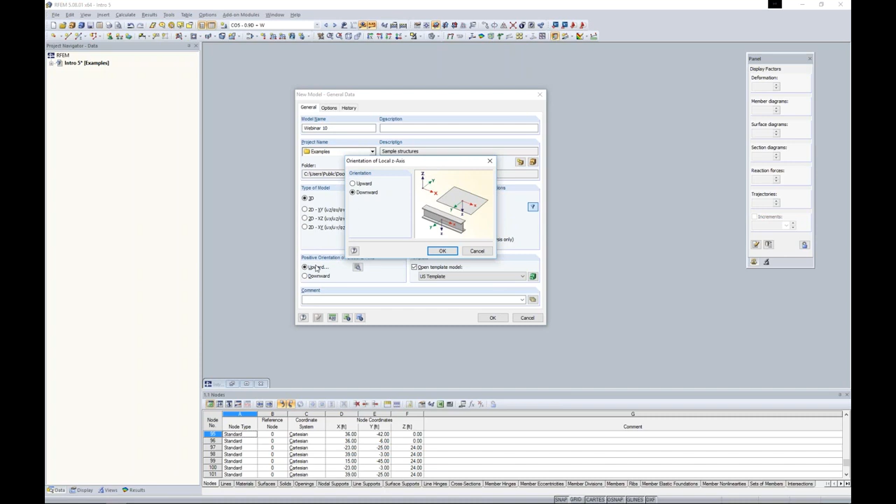The orientation of the global z-axis, that by default is set to upward for the United States install. That's typically what we work with here. Under Details, we'll want to make sure that our local z-axis is set to downward. This is more so important for concrete design; otherwise it really doesn't matter in the program. But I always suggest if you have the global z-axis upward to set this as downward for our local member axis.

Over here, we have Create Combinations Automatically checked on. When this is checked on, this is telling the program to automatically create these load combinations according to a specific standard that I select in my dropdown. This is where you can see that we have the ASCE 7 load combinations, IBC, the Canadian standard, as well as Eurocode and several other international standards.

When I have this checked off, then I can manually create those load combinations. They won't be automatically created for me according to the specific standard.

The template model down here is important because I think it's a very beneficial option. For me, I have this US template, and this just has the grid settings set up the way that I like, maybe my units, perhaps certain materials and cross sections that I use quite often.

Once I'm in RFEM, I can always go to File, Save as Template, and then that template will be available in this dropdown. This is great for companies who maybe do a lot of similar structures and all start off with the basic type structure to begin with. You can model that basic structure and pull it up in your template model every time, then make further changes.

So now we're ready to jump into the program. When we first open up the model, we have our graphics view located in the center of the screen. As we begin to draw elements within the model, this is where they will begin to appear.

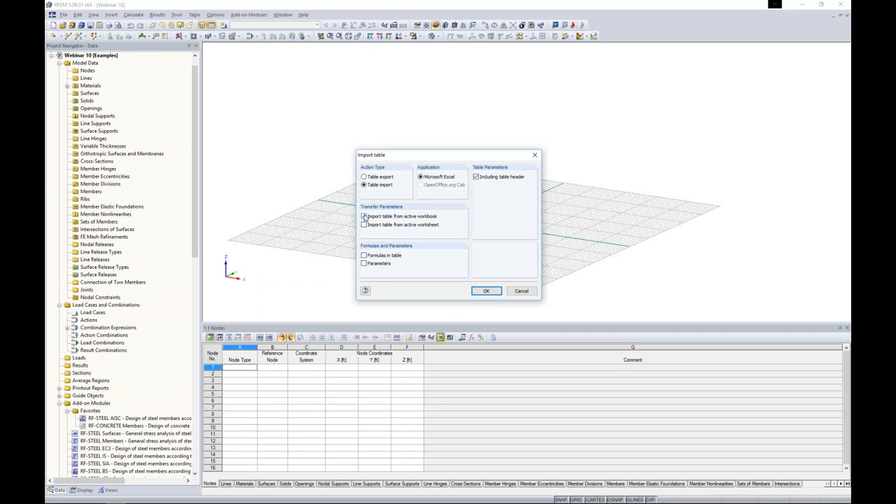For example, we can export this table for our nodes to get the basic layout with all of the correct columns. We can input our data in Microsoft Excel, maybe sort it some different ways, and then we can import directly from Excel according to the active workbook and worksheet that we're in the background.

A few other options that we have for modeling are, of course, all of our little tools up here, which we'll be using quite often today. We also have our drop-down box up here. For example, we have all of the add-on modules listed according to the different categories, such as steel, concrete, dynamics.

We also have the Project Navigator, and the Project Navigator is just another option to input your data. We will also view our results in the Project Navigator. So this first tab down here called Data, this would be all of our input data, and here is our long list of add-on modules here.

So you can understand that we serve our customers the add-on module concept because we really want to create a software that's catered to you and your needs, rather than charge you a very expensive software where you get all of these add-on modules regardless of whether you're going to use them or not. For example, you can see all of the different international steel codes that we have here that probably most of the time users aren't going to be utilizing. So, as I mentioned, a very long add-on module list.

The display tab really controls everything that we're viewing graphically here, including our results after we run an analysis, as well as the input data. Our views tab looks pretty empty right now, but as we begin to generate our structure, this will allow you as a user to create user-defined views, to view certain materials and sections quickly, rather than having to highlight and select them graphically.

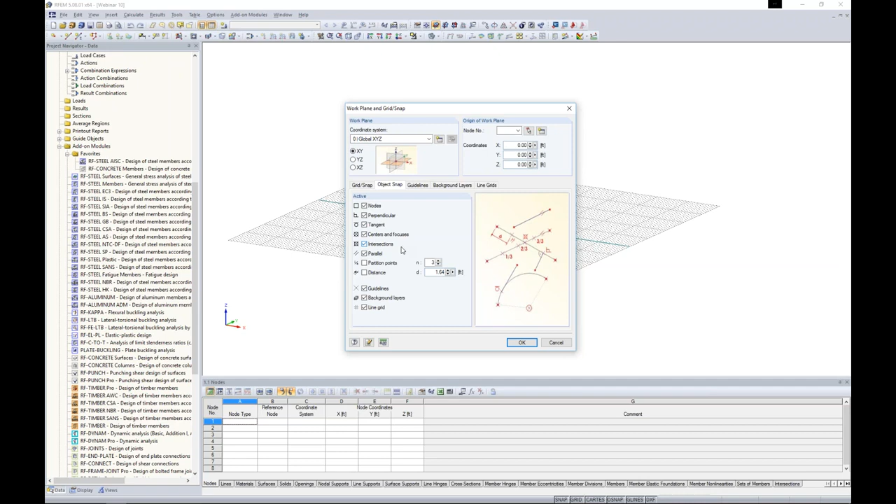And this is for the reason sometimes I tell users you're almost better off just starting modeling in our program rather than importing a DXF file, because it's easier that way, due to all these different tools that we have. But with that said, you can import DXF files too.

For example, under the background layers tab is where we can import this DXF. And what's nice about the different background layers is I can put multiple layers in here, so maybe I have a different layout for every level of a multi-level story building. Well, I can go ahead and import that DXF file at multiple elevations.

The line grids option - if I create a new line grid here, you'll notice in the background that we have our typical 2D layout of our project grid. Well, this allows us to do a 3D project grid. Down here at the bottom, you'll notice some different options that we have, for example Cartesian, which is maybe more of a square, rectangular, 3D drawing grid. But we also have spherical, cylindrical, and incline.

So this really plays an important factor, again, for these not so simple geometries that you may have, but have different snap points in a 3D type environment that you'd like to utilize. Well, that's where these line grids may come in handy.

Under the grid snap settings, this is my current grid that I'm viewing here. Default when you launch the program is this rectangular grid, but we can change this to polar if we'd like, if we're working with a circular type structure. Right now for Cartesian, I have 50 feet on either side of my origin, but I can also check this checkbox so that the project grid will actually grow with the structure, moving dynamically according to the size of the model. Or if I shrink my structure down, that project grid will shrink down too, so I'm not always having to go back in here and change my settings to something bigger or smaller.

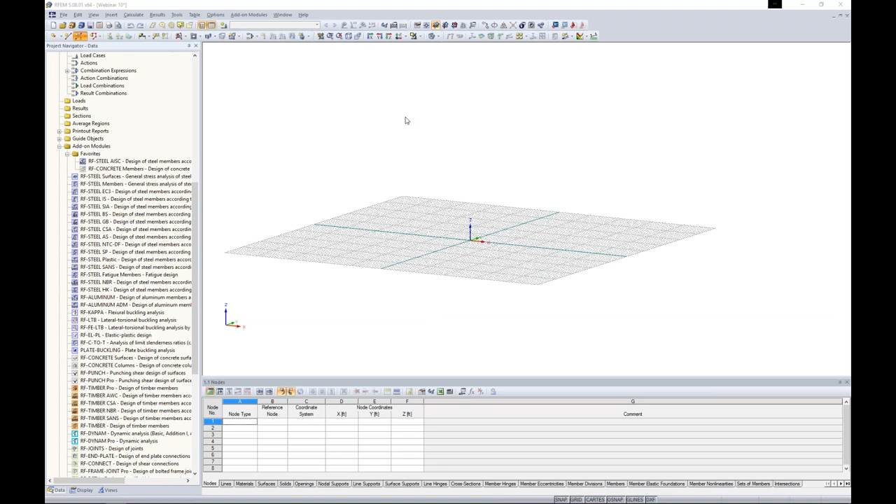For now, we'll just leave everything the way that it is, and we can begin with our first column. So the first thing I'll do is go up to a new single member. Now, the member type is available in this drop-down here. The member type beam is anything that's just a typical beam or column type element. You'll also notice that we have many other options in here. A rib is something we'll utilize a little bit later on, but we also have tension only, compression only, buckling is something that we'll also utilize in this model today.

And then because of our nonlinear capabilities, we can do things like cables, or cables on pulleys. We can get into spring elements. So quite a few other options than just your typical application of a beam or a column.

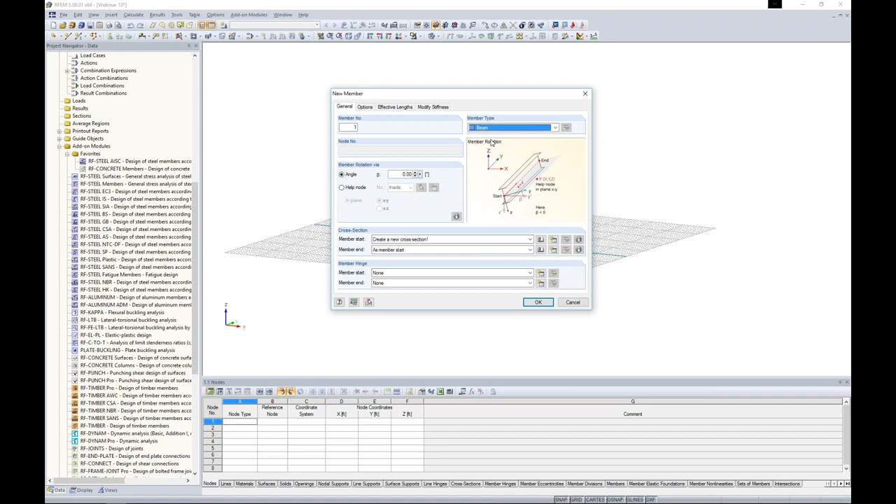But with that said, we will choose the member type beam and we'll create a new cross section. Launching our cross section library, you'll notice that we have our rolled sections where you'll find all of the sections from the CSA code, the AISC code, maybe aluminum sections from the ADM. These are all available in our cross section library.

But we also have these parametric thin-walled sections. We have massive sections for concrete. You'll notice maybe in some other software you're really left with only a rectangular or circular type application for cross section. But here we can utilize things like I sections, T sections, same with timber sections here. And we can even get into built-up type members. So we're not limited to just those sections directly from the codes, but we can really utilize a wide array of cross-sections here.

For example, if I have an odd thin-walled cross-section here, all I need to do is to define my geometry, and then the program will automatically calculate the section properties for me.

We also have two standalone programs called Shape Thin and Shape Massive, and this is where you can import in a DXF file, for example, and that will calculate the section properties for you, and then we can import them directly into RFEM. Those are standalone programs.

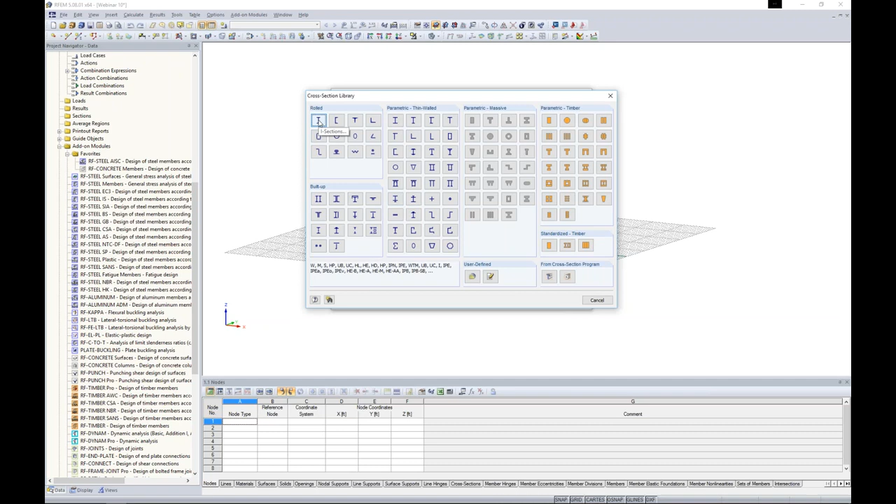For today, we will go with a typical I section, and here is where we can use our filters on the left-hand side. From the first drop-down, you'll see that we have many different standards here. So that's great. If you do a lot of international projects, you'll have access to all these as well in RFEM. This is independent of any add-on modules.

Today, we'll be working with the AISC, and we want to first choose our W shape. Now, we have this long list of W shapes, which just comes directly from the AISC 2014.

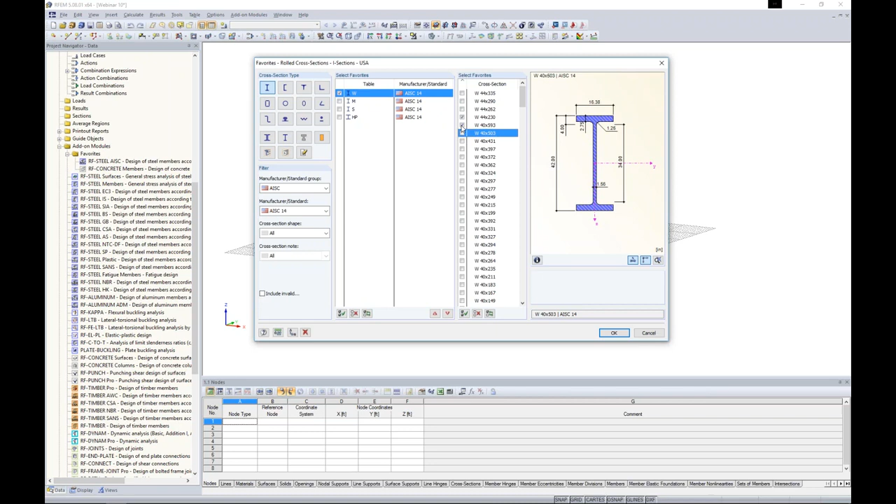But perhaps you use a lot of the same sections and you don't really want to scroll through this long list every time to choose your specific W shape. Well, this is where we can utilize our favorites group. With a favorites group, and I choose my edit button here, I can simply check on or check off maybe a set of sections that I use quite often. Then when I click OK and I activate this favorites group, then I'll have these sections available from a quicker list than having to sift through everything.

For today's example, I added a couple W shapes that I know I'm going to be using for this example. So now I have quick access to them.

We can also set the material in the same dialog box. You'll notice in this drop-down menu, the default when you open up RFEM is concrete F'C 4000, and we have steel A992. So for right now, we'll just utilize the default material in the program, but later on we'll have to add in some more materials to that.

The member hinge is set at fully fixed. So right now we will not add in any member hinge, but later on we will do this as well.

So now I'm ready to draw my first member. Well, typically when drawing the member, we need to change maybe our drawing grid and maybe snap to a couple different points. But another useful feature with this dialog box when I'm drawing a new member is to simply specify the length and the direction.

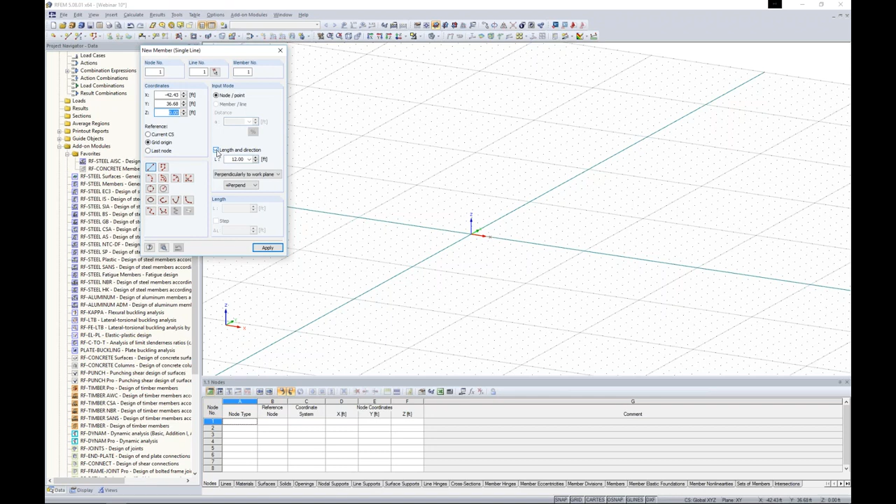So I can set the length to 12 feet here, and I want to draw it perpendicular to my work plane. My work plane is set in the global X-Y axis. All I need to do is just click on a couple points here to draw in my first columns. Now you'll notice that the orientation is in the correct direction and my length is set correctly too with that useful feature.

The next thing to do is to draw a beam member connecting our two columns. So again, I'm just going to go to my Draw New Beam. I'm going to create a new cross-section. And once again, choosing a rolled cross-section under my favorites list, I'm going to choose a W12 by 40.

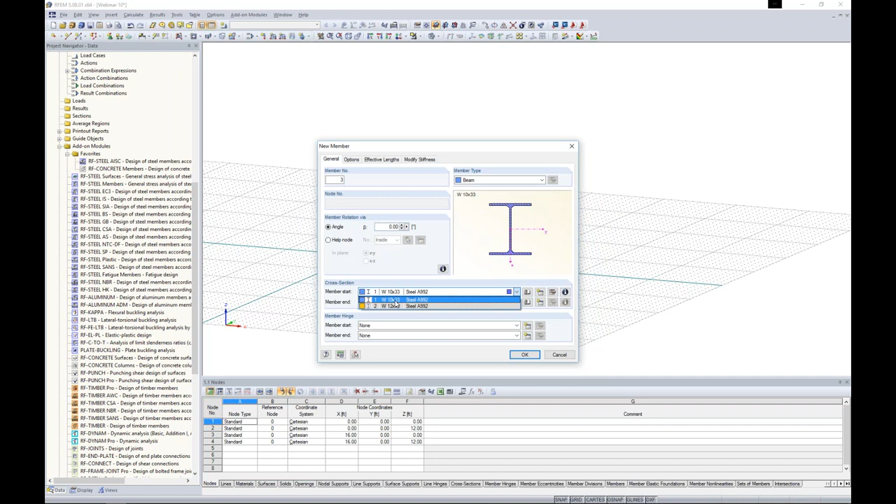And I just noticed I used a W12 by 40 here. That's okay. I wanted to actually use, which I can click on this Edit Cross-Section, and we can edit it here to quickly change that 12 by 40 to a 10 by 33. That's my column member. So now you'll notice that my columns are 10 by 33 that I've already modeled in here.

And then my new member will be a W12 by 40. I want full fixity, so still no member end releases. And now I can snap to the top of those columns, and you'll see those green snap points pop up. That's just related to those snap features that I showed you when we first opened up the program.

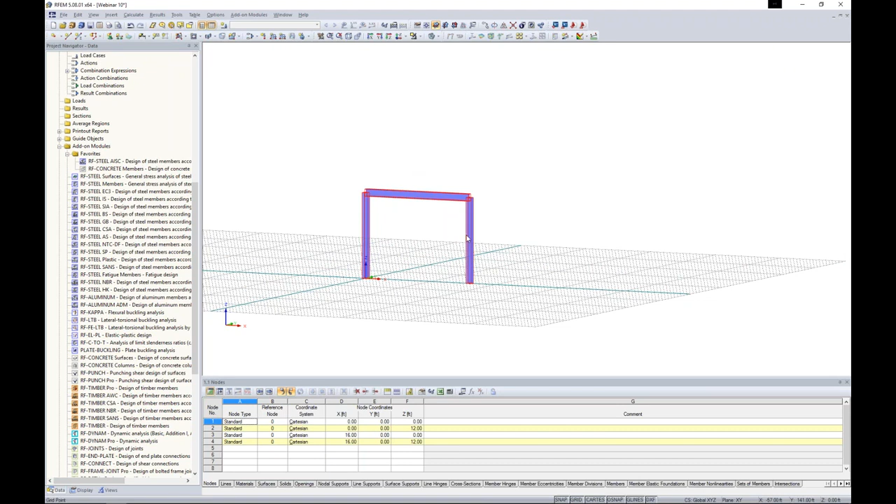So I want to create a couple copies of these. Rather than utilize the Move Copy tool, if I just highlight everything here, I hold down my Control key, then we can utilize the drag and drop feature. So we can quickly create copies of this member, additional couple stories here, with just holding down the Control key, drag and dropping, and the program will do that automatically for us.

Now the next thing I'd like to do is to select all of these members, and I want to right click under the member option. I will create nodes on lines and intermediate nodes. So here I'm going to add 2 intermediate nodes, and you'll see that this member is still a single continuous member, and these nodes, if I double click, are of the type online. You can see here we have either standard or online, so the program knows to integrate that directly into that member.

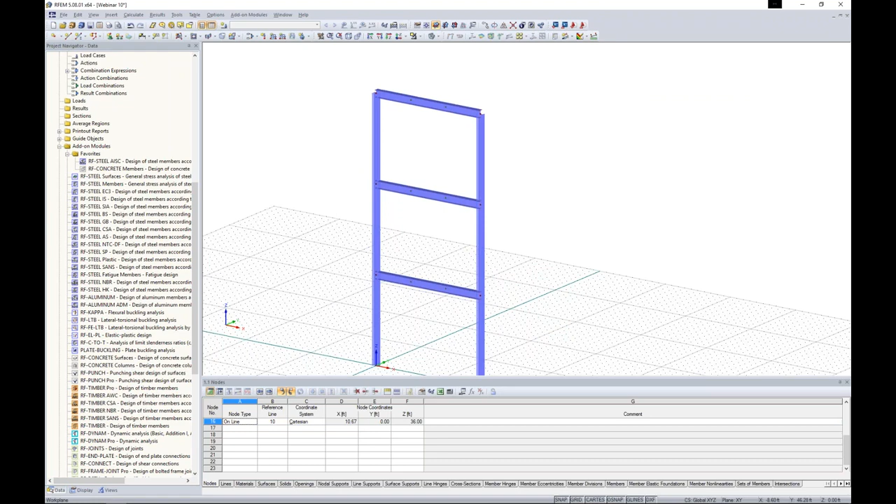So now that we've added those nodes, I'm going to select everything above my bottom two nodes, and I'm going to utilize the Move and Copy tool here. I'm going to create two copies in the global Y direction of 16 feet. And we have a special feature down at the bottom of this dialog box called Edit Expanded Settings. So when I open up this additional dialog box, we can actually create lines in between our copy nodes, and even more so, we can assign a member cross-section to those lines.

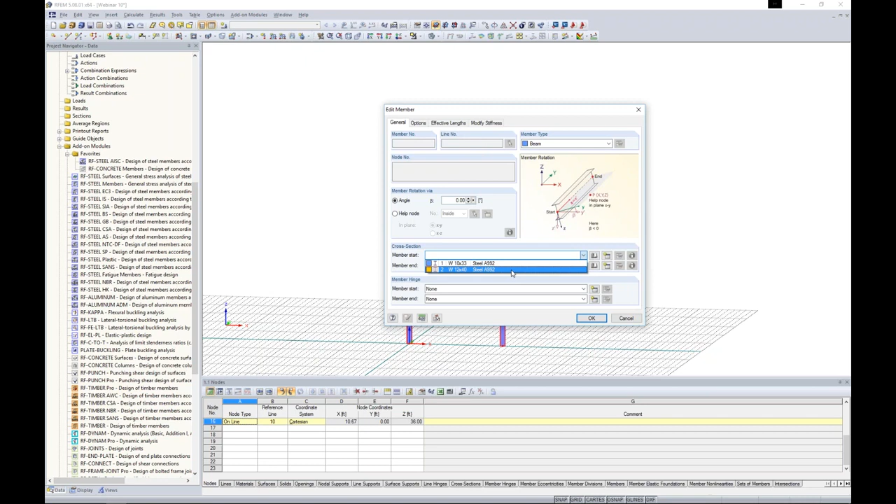Every cross-section or every member is composed of a line underneath it. So because we're creating members between these copy nodes, maybe I want to choose a cross-section from my Edit Member dialog box here. Well, I've already defined the W12 by 40 previously, so now that's available in my drop-down box here. I can click OK through all these dialog boxes, and now you'll notice that the program automatically created these beam elements between my copy nodes, so I don't have to sit there and draw in all of those additional beams, but rather utilize that function.

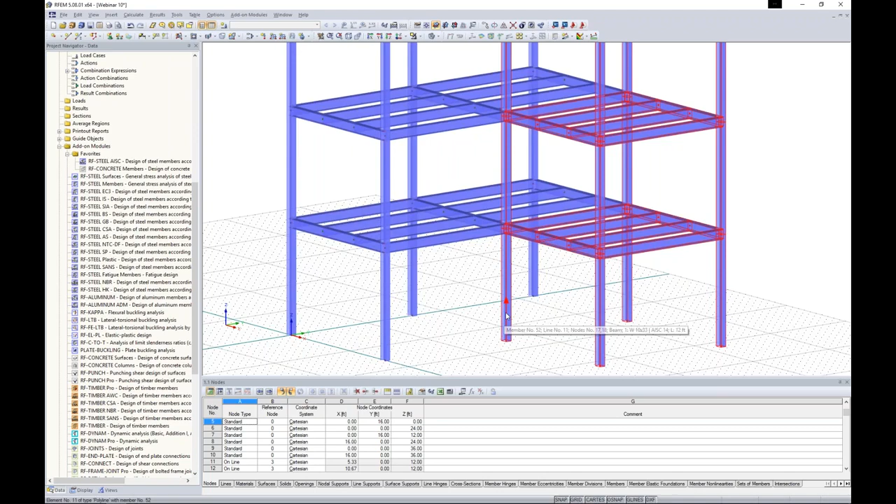So now I'm going to select this rear portion of my steel frame, and holding down my control key again, I'm going to make an additional copy right adjacent to it. And you'll notice that when I made that copy, I technically created a column on top of this column, but the program's smart enough to merge those together so we don't have any issues with duplicate members being on top of each other. So again, a nice feature of the drag and drop. So essentially, we have the basic structure for our steel structure here.

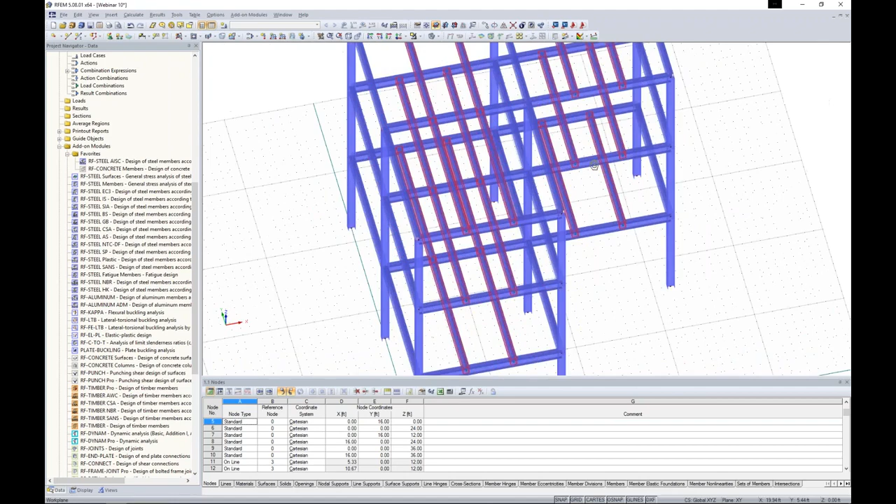Now, the next thing maybe we'd like to do is to put this into elevation view, and I'm going to hold down my control key to select all of my intermediate beams here. You'll notice that they are highlighted with red, and what I can do is to right-click under Member and choose Edit. Now, under the Member Hinge, this is where I'm going to create a new member hinge. Up pops our member hinge dialog box.

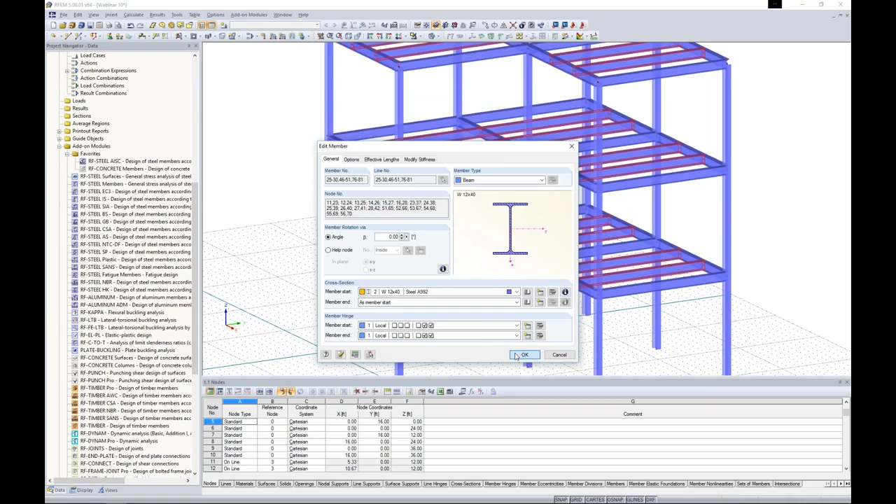Again, this is very technical if we want to get into the more advanced features of modeling. We'll just leave this as none and apply a simple moment release to the ends of our members. So now for any member I model in the future, I'll have this simple moment release to apply from my drop-down box.

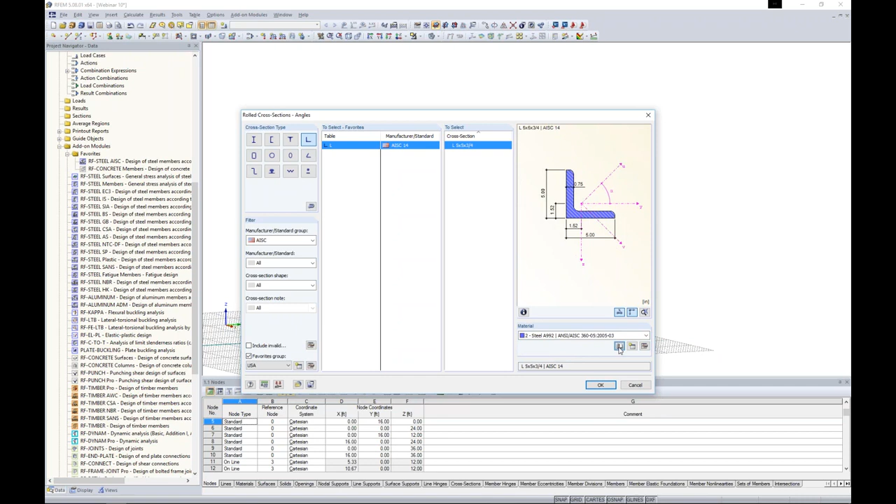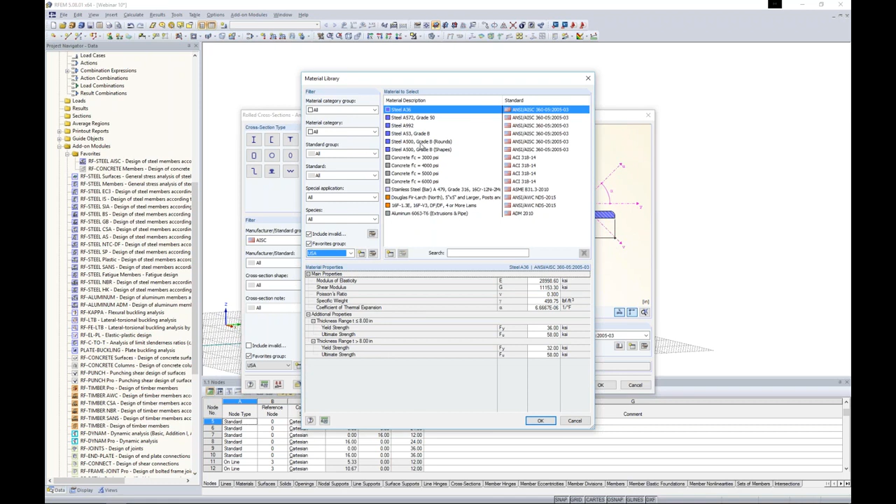Steel A992 is not applicable here, so I can quickly create a new material. This material database looks similar to our cross-section database—we have filters on the left and all the materials from AISC 360. But I can also activate my favorites group, and you'll notice I have just a handful of materials I use quite often. Steel A36 is what I'd like to select here. I click OK, click OK.

Now for the member type, I'm going to set this as buckling. What does this mean? It means that when this member exceeds the Euler buckling load, the member will be taken out of the analysis and the iterations will be rerun. This makes sure that if a member fails, our structure is still stable. So we'll set this to buckling.

You'll notice that member hinges is automatically grayed out. This is because we assume you'd like to have a full moment release for any type of tension-only, buckling-only, or compression-only member. We click OK, and now we can zoom in and snap to the corner points where we'd like to add this bracing.

So once I have these two braces modeled, I can use my selection tool and utilize that drag and drop feature to add some additional bracing to the structure.

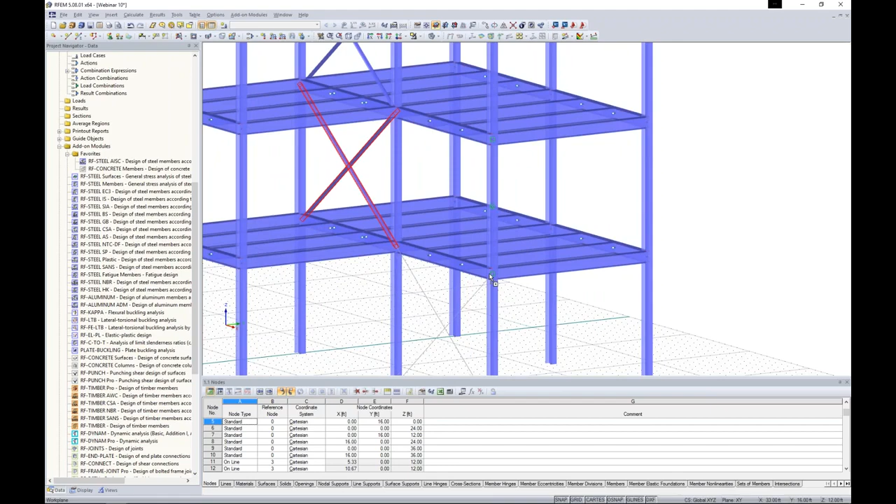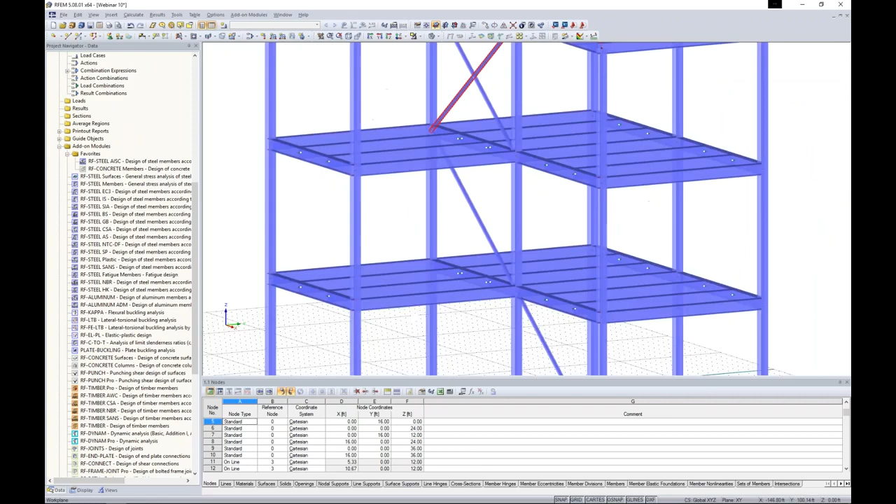Looks like we have some mistakes here—no problem, I can delete that and draw in an additional L member here. All I did was not snap to the correct place, but you can see how quickly it is to select your member, delete it, and recreate it using the drag and drop feature once more, and that looks a little bit better.

So now that we're done with our steel structure, what I'd like to do is create an adjacent concrete structure, and we'll connect those two structures once we're done with our concrete application.

Utilizing this tool to set the origin of the grid or work plane, all I need to do is select this tool and click on the corner of my structure at the first level. You'll notice my drawing grid has now been placed up to my first level—it's nice that we don't have to go into a separate dialog box to rearrange the origin, we can do so just at the click of a button.

I'll once again turn this into elevation view. What I'd like to do now is add some nodes to my structure. I could use this feature to add a new node and draw it graphically, or we can use our tables down here. To utilize the tables, you'll notice I'm under table 1.1 nodes.

I'm just going to scroll down to a place where I have some open space. I'm going to create my first node, and all I need to do is specify the specific coordinates where I'd like to apply this node. We'll start with -23 in the x, -25 in the y, and z will be 12. Then simply using my down arrow, I'll create my second node at 39, -3, 12, and lastly my third option will be at 15, -45, 12.

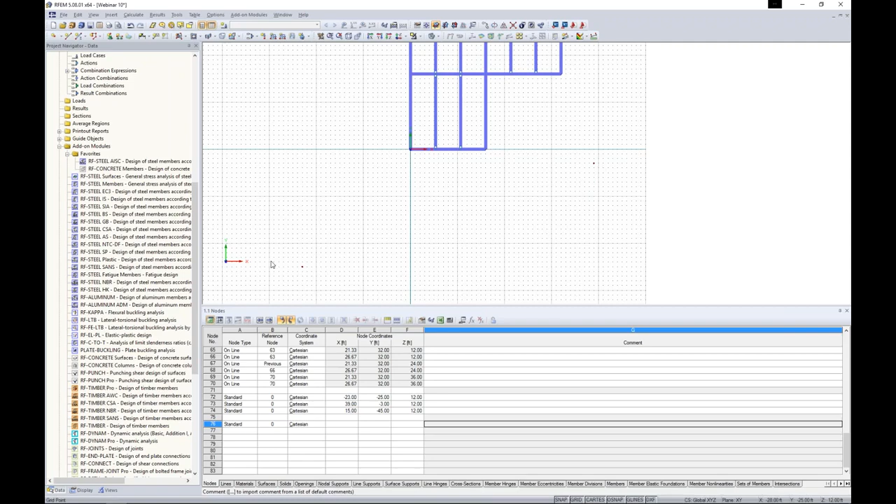So this is just another way that I can create these nodes, as you can see them up here in my graphics view, quickly rather than utilizing the drawing feature. You're probably wondering why I'm creating these odd looking nodes generated out here in space.

Well, the next thing I'd like to do is create my surface element, which is going to be my elevated concrete slab at this first level. Using this drop-down box in my toolbar, you'll see all the different surface applications we have. It's not just a typical rectangular section, but parallelograms, circles, semicircles, ellipses, polygons—basically any shape you can think of, because we want to cater to odd geometries too. For our case today, we'll stick with the typical rectangular shape.

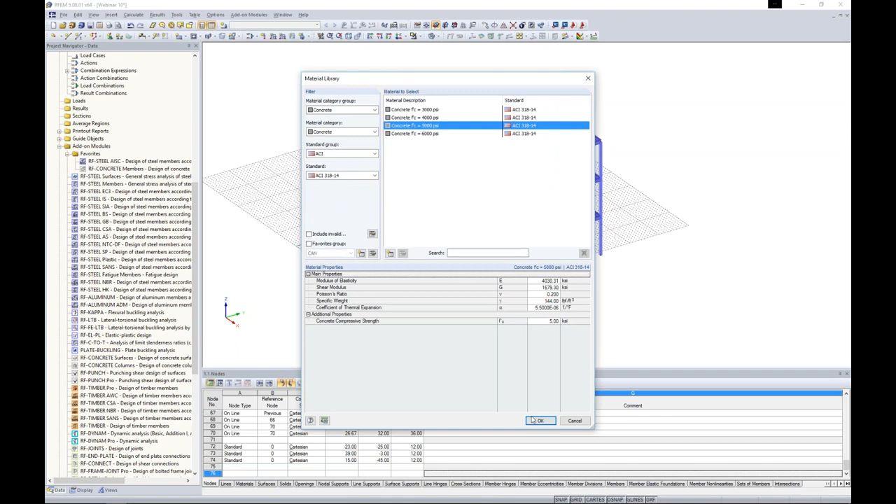For a surface element, the first thing it asks is what material and thickness do you want to use. 4000 PSI is the default within the program, but by using my Edit Material button and opening up my database, I'd rather choose F'C 5000. I click OK, and now you'll notice my material has been updated.

My thickness, I'd like to use 10 inches here, and the stiffness is set to standard. For concrete, for example, this would be a two-way slab—just a standard thickness and stiffness in both orientations. But we also have orthotropic here, and when I click on the details button of orthotropic, this gives me a lot more options within my concrete surface element.

For example, effective thickness—if I go to my effective thickness tab, I can specify two different thicknesses in both my X and Y direction, for maybe a one-way slab. Then I can even view my stiffness matrix for that particular surface to see exactly what's going on in terms of stiffness for each element.

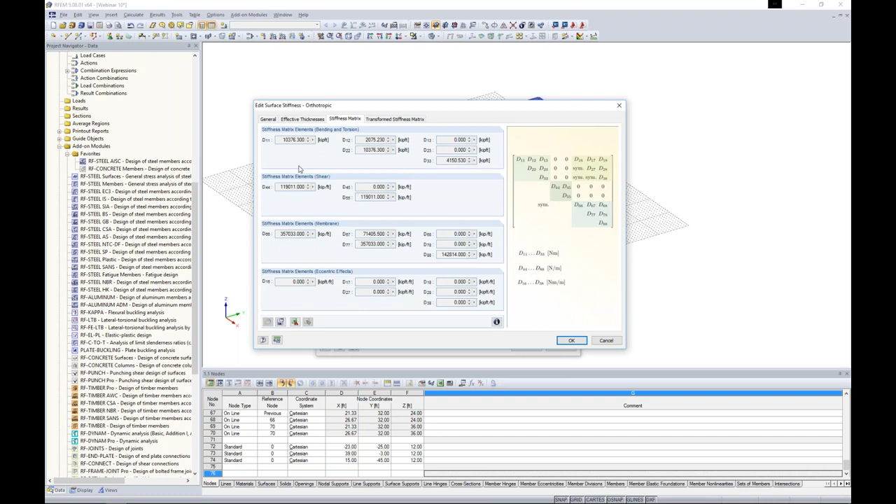We also have a few other options here, such as hollow core slab, where we simply define some geometric properties and the program automatically determines that stiffness matrix for us. Grillage would be something like a waffle slab for a foundation, and we have box floor girders as well. For today, we'll cancel out of this and choose the standard stiffness for a two-way slab.

I click OK. The reason I was utilizing these nodes is because I only need two snap points here to create my surface element. Now I currently have two separate elements here, but maybe I'd like one continuous surface for my elevated slab. No problem—if I click on the surface and click Delete, I'm left with all the external lines. I can delete this middle line.

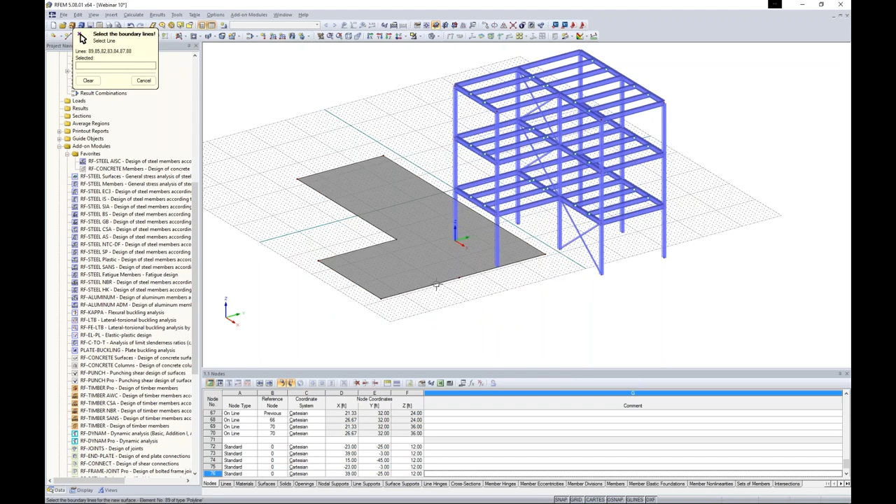So now I can go create my surface, but this time I'm going to select my surface using boundary lines. Again, this same dialog box is brought up, but it remembers my settings from last time. I click OK, and all I do is click on those external lines to create one continuous surface here.

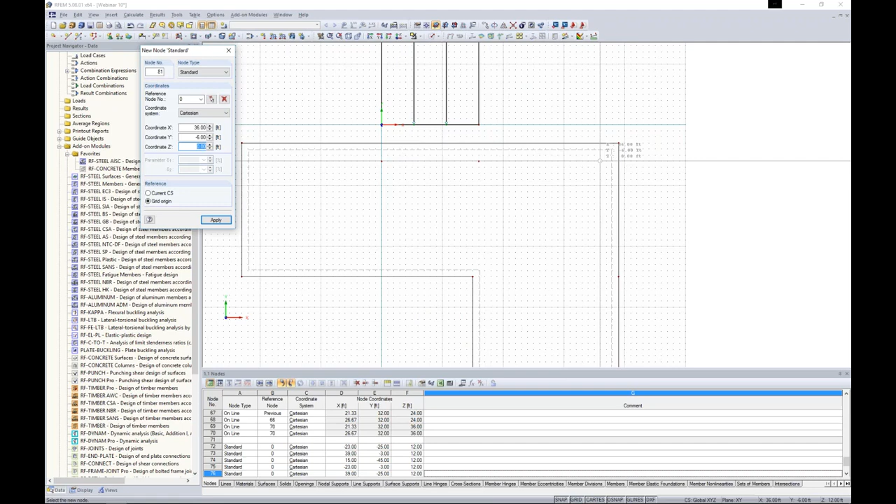Now putting this back into elevation view, we probably would like to add some columns here to support our surface. So what I'm going to do is add some nodes, and first I'm going to change this into wireframe—it's a little bit easier to see. All I'm doing is clicking graphically now, rather than adding them to the table like we did previously, to mark where I'd like to apply some column elements.

I'm just adding them about 3 feet away from the edges here. You'll notice on the right-hand side I'm going to skip adding a column over here, and you'll see in just a minute why. Now, these are just simple nodes, nothing too special here. So how do we quickly create some columns from these nodes?

I'm going to use my selection box, hold down my control key to highlight all of these nodes, and then utilize my move-copy tool again. This time I'll create one copy in the global Z direction of negative 12. I also want to use this create-members-between-copy-nodes option, but I'd like to create a new cross-section. So here's where I go back into my cross-section library and utilize a parametric massive section—specifying our basic geometry of 15 inches by 15 inches.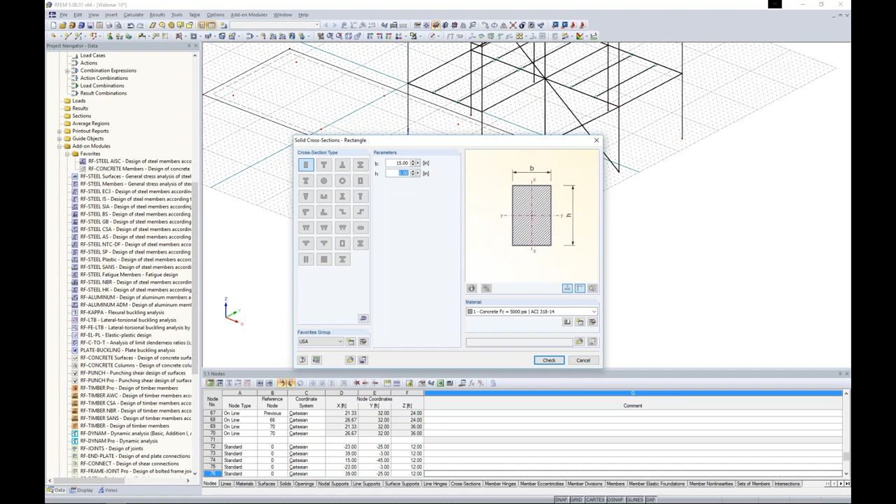I can click my info button to get all of my section properties here that the program automatically calculates. Concrete F prime C 5000 is good. I'd like full fixity here. I click OK, and I click OK through all these dialog boxes.

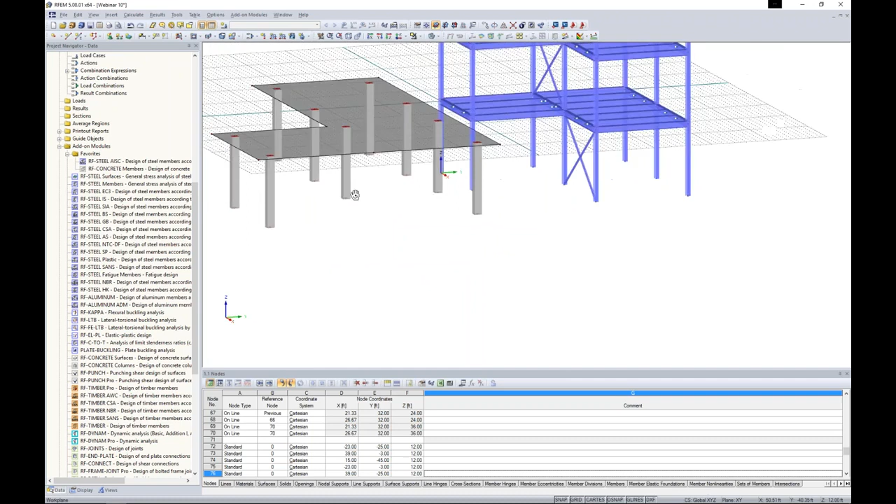Now turning this back into the rendered version, you'll see that my columns were automatically created using that move and copy tool. So the next thing I'd like to do is create a second floor. I can hold down my control key, use my drag and drop feature once again, and now I have my second floor here. The reason I skipped the column over on this side is because maybe I'd like to create a rib type beam underneath my slab here.

Well, the first thing I'm going to do is draw a line element. Now, a line element is not a member. We can create a member from a line element, but it's just a simple line. So here I'm going to snap from the top of my column and also on my first level here. Now, what do I want to do with these lines?

Well, if I hold down the control key and select both of them, I can right-click to edit the line. And like I mentioned, this is just another way to create a member, but every line or every member is created from a line. So we have a member tab here where I can select the option available, and I will create a new member type, but this time it will be type rib.

Now I need to go into my detail settings here, and the first thing the program's asking me for is where is the alignment of this rib member in comparison to the surface element? Well, I'd like to move it onto the local positive Z side of the surface, which you can see my little picture updates here.

And we can actually take into account for both the analysis and design portion of this rib some effective widths. We can either do this automatically with L/6 or L/8, or we can manually enter them in. So for side 1, I'd like to choose L/8, which will be this side over here. For side 2, I'm going to choose manually 3 feet, and that's because I'm at the edge of my slab element here. I click OK.

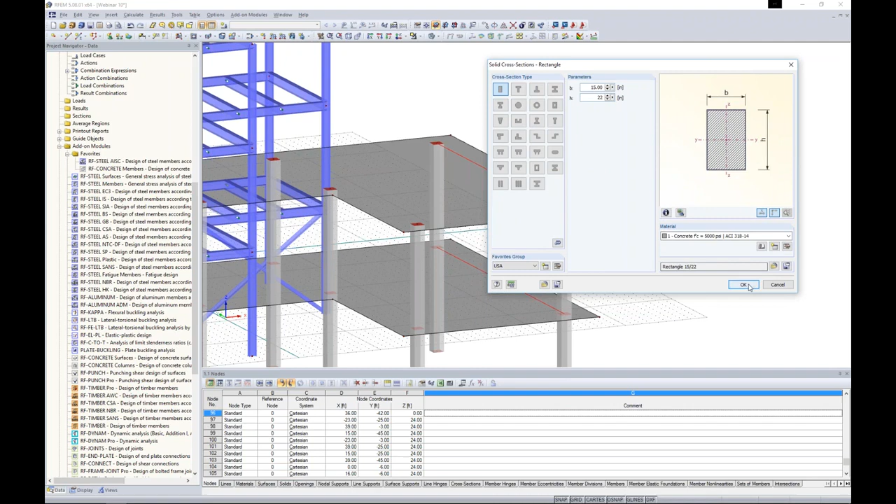No member hinges will be applied here. And what I do want to do is create a new cross-section quickly with my parametric massive shapes. This time it will be a 15 by 22 inch deep member. Click OK. And now you can see that beam member was dropped down below the surface, but it will be taken into account with the effective width of the surface itself.

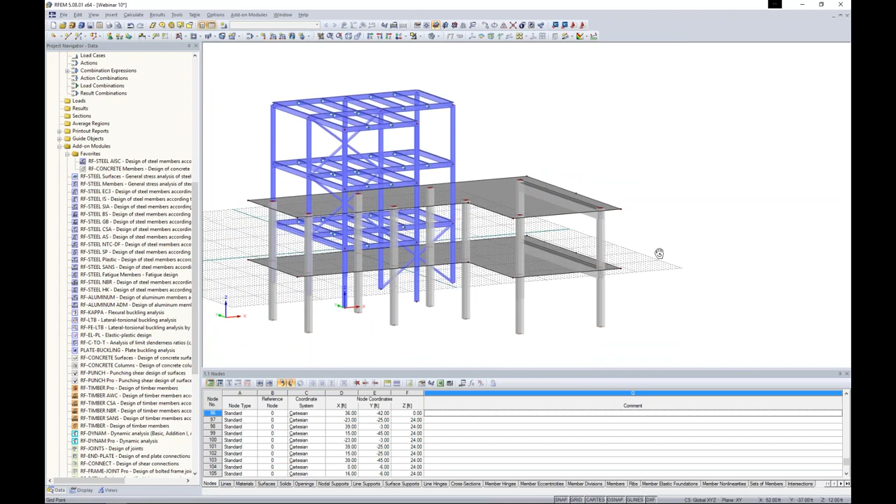Now, all the program's doing is dropping little rigid links along the length of the member at every finite element for the surface. Okay, so one other thing we need to do before loading our structure is we need to quickly apply some nodal support. So I have a quick button here to apply a new nodal support, but I can also utilize my project navigator here.

You'll notice here's my cross sections within the program. Here's my surfaces. Here's my material. So all of your input data is available here as well. So under the option nodal supports, I'm going to right click and choose new nodal support.

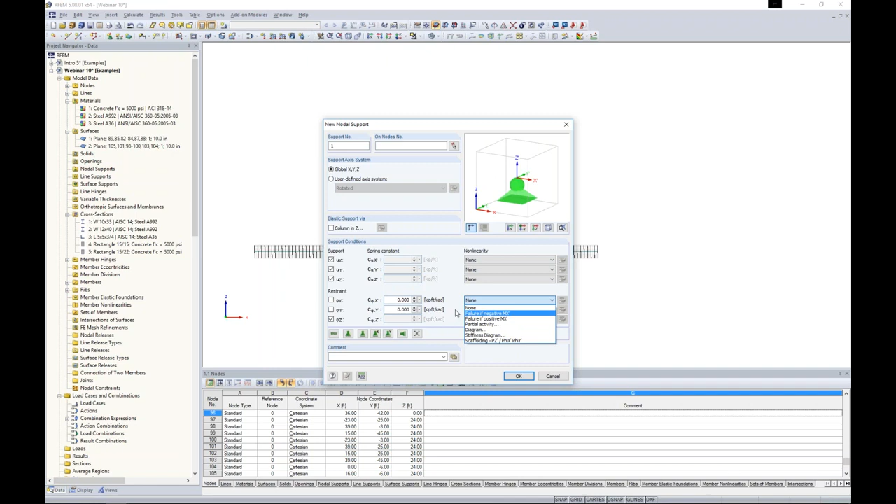Again, this should look similar to the member end releases that we utilized before. We can either set this as fully free or fully fixed in terms of translation and rotation. We can also do partial fixity. And then the nonlinearity capabilities of the program will allow us to take into account things like partial activity. Maybe we have a sliding or we have friction that we'd like to take into account. All of that can be done.

For us, we will just choose a fully rigid connection, and then I can choose the bottom of my structure and the nodes graphically, click OK. I'll turn off my grid settings down here at the bottom, and now I have my structure with the nodal supports applied. One other thing we'd like to do is to quickly connect our two structures here.

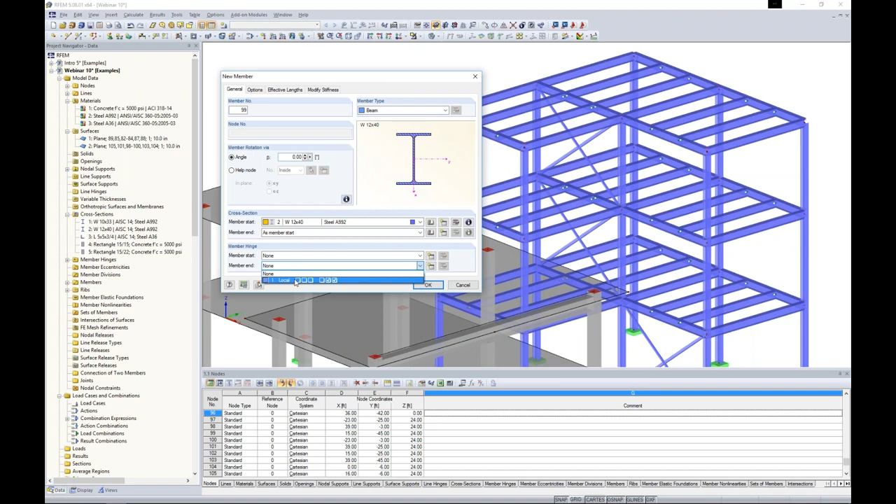We have the member type, we'll choose beam here and selecting a W12 by 40. The member start, I would like it to be fully fixed, but the member end, I want to apply that moment release. I click OK, and then you'll notice that I have those snap points, and automatically the program recognizes what is perpendicular to the surface here.

So I don't even necessarily have to create a new node, but I can utilize those snap points.

Now that we've automatically generated our structure, the next thing we'd like to do is apply some loads. Under new load case, we create our first load case and give it a description of dead load. The action category is important because it tells the program how to apply it to the different load combinations according to ASCE 7.

You'll notice that for dead load, self-weight is automatically checked on. This is how we can take into account the self-weight of the structure automatically based on the element's densities.

We create our second load case, which we will call live, and give it an action category of live here. You'll notice self-weight is checked off, otherwise we'd be accounting for it twice.

And lastly, we will create a third called wind and apply it to the action category of wind.

Under combination expressions, the program is going to create both LRFD and ASD combinations. I can click this info button to see exactly what combinations are applicable from section 2.3 of the ASCE 7. Under load combinations, this is where my load combinations are actually generated for both LRFD and ASD. What's nice is that only the applicable load cases are applied here, so we're not having to worry about sifting through snow loads or earthquake loads that we haven't applied to our structure under the load cases tab.

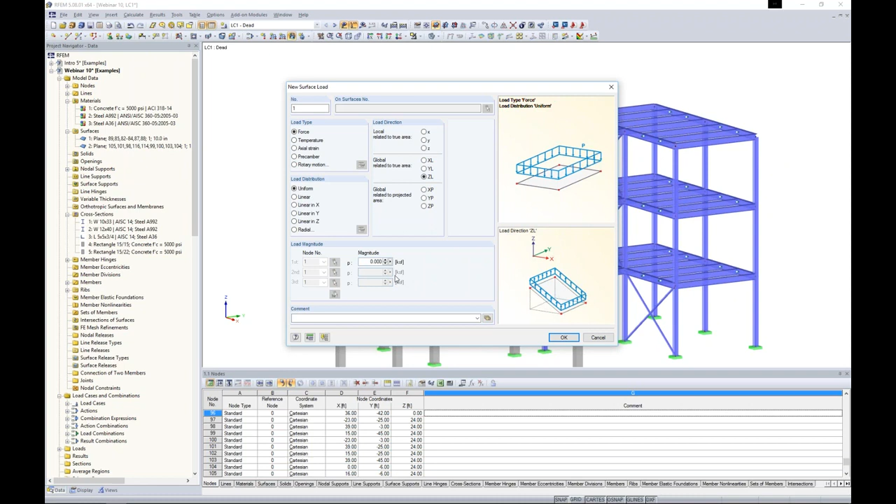We will apply a magnitude of negative 0.1 kips per square foot. I click OK, and all I have to do is click on those single surface elements to apply that dead load to my elevated slabs.

In a similar manner, we would like to apply a dead load to our member elements here. We could certainly apply a single member load in kips per foot on each one, but rather I'd have the program determine what the tributary areas are for each member and do that automatically, which we have a feature for. Under Tools, Generate Loads, you'll see we do have snow loads and wind loads.

For example, according to the different standards such as ASCE 7. But these snow load and wind load generators require a structure that looks similar in geometry to this. When you get outside of this realm, you can no longer use the generation of these load combinations for the application of the structure.

But if you do have a structure similar to this, it's great because then we can choose a place on the map here, for example, that we'd like to apply our ground snow load, give it a few other factors, and the program can automatically create that for us.

For today, as I mentioned, we don't have a structure like that—we have a little bit more odd geometry. So under Tools, Generate Loads, we'll choose the option Area Loads via a Member. Similar to what we saw with the surface load, we needed to give it the area load direction, and the global ZL direction is what we'll choose.

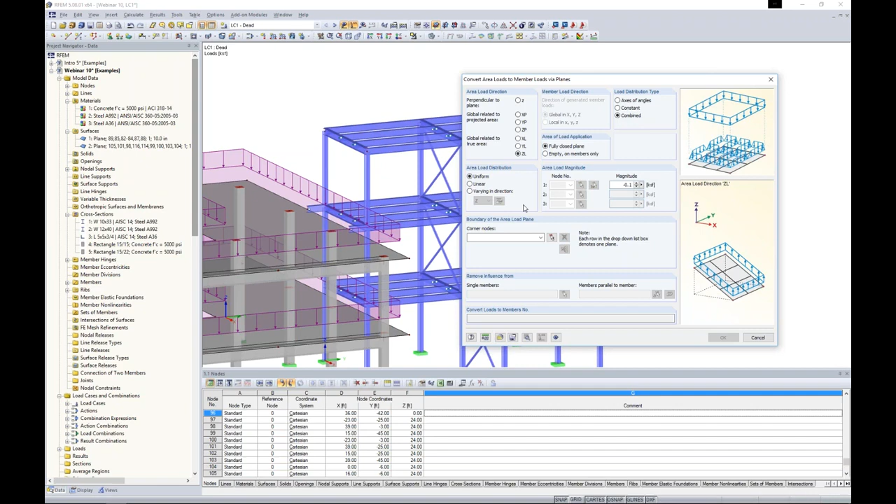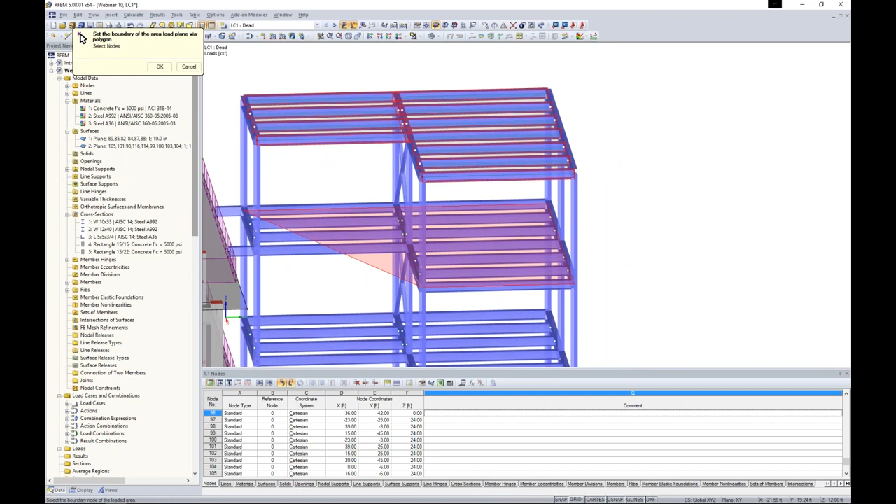What I'd like to do now is choose my corner nodes where I'd like to apply this area load. There are a couple nice features here: number one, it doesn't have to be a typical rectangular application. You'll notice I'm actually choosing a polyline application for an odd geometry, for example.

Number two, I'm applying it to different levels here, closing off each plane individually. So I can apply this to not only my first level, but also the second and third at the same time. All the red members are highlighted, indicating where this area load will be applied.

But now I can exclude members parallel to a certain member. So I can graphically choose, for example, this member here. I click OK, and the program will automatically create this area load, which we can see by this faint gray line here.

Maybe I'm interested to see how this load was applied to each member. I can right-click, display separately, to see that I'm only applying it to these members in the global Y direction, and I can view the magnitude by zooming in here. So just a quick application and the program can automatically figure out these tributary areas.

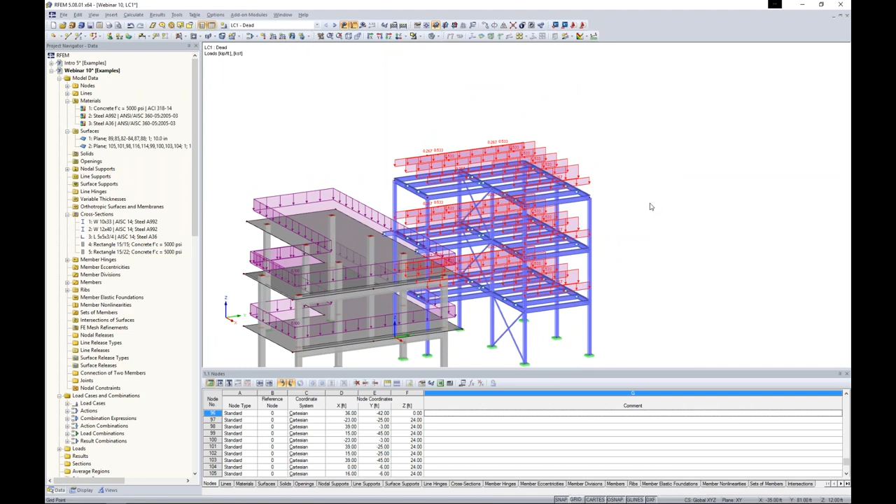In the same sense, I'm going to apply a live load, again with a surface load. All I'm going to do is change the magnitude to negative 0.05 kips per square foot, click on my two surfaces, then under Tools, Generate Loads from Area Loads via Planes.

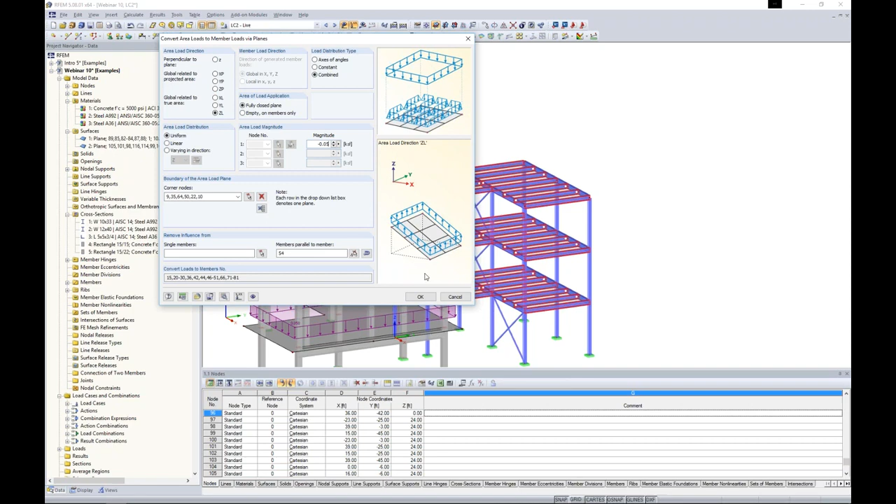The program remembers all of my settings that I just previously set for my dead load. So all I have to do is select negative 0.05 to change my magnitude. I click OK, and all of those loads are automatically generated for me. I can right-click to display in a nicer view here if I'd like.

Lastly, we want to apply some lateral loads here according to wind loads. The first thing I'm going to do is choose a new line load. A line load is different than a member load, which is right next to it, because a line load would be applied to a surface element here where we don't have a member at this location, but rather we have a line element.

Again, this should look familiar, maybe a little different view, but all we're doing is applying a load direction in the global Y direction this time, giving it a magnitude of 0.3 kips per foot. Then all I have to do is click on these different line elements to apply that lateral load.

Maybe for my members up here, I'd like to apply a member load though. So right next to line load, I choose member load. Again, a few more options here in terms of temperatures and axial strains. For this, we'll stick with the global Y direction and apply this as 0.3 kips per foot. I click OK, and I click on this single member.

So lastly, for our wind load, we probably would like to apply member loads in a similar fashion to these vertical columns as well as our steel structure and our concrete structure.

Going back to member load, this is where we can utilize maybe the trapezoidal function. You'll notice here that we have the tapered option. We can even get into parabolic type load application. And in most of our loads that we manually apply, we have this varying option.

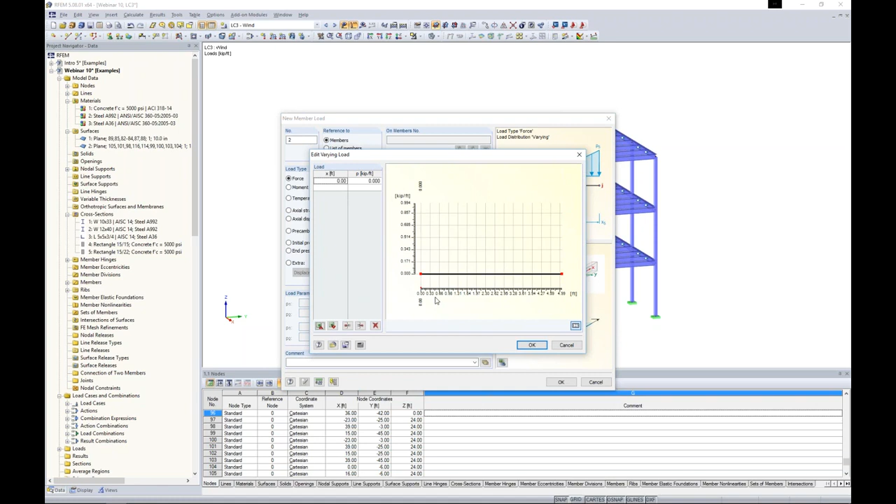If I go into the details of this, you'll notice I can import directly from Excel multiple locations along my X length of my member as well as the load magnitude. So just for more complex applications—but for today we'll stick with this trapezoidal load.

P1 will be 0.1 kips per foot, P2 will be 0.3, and I'd like it over the full length of the member. So now I can just click on my members here.

Now you'll notice as I'm clicking on these members that typically with wind loads, I would like to apply a higher magnitude at the top and lower magnitude at the bottom. Well, that's fine for over here, but it looks like our concrete members are opposite.

So I could easily double-click on these member loads and switch them around, but you'll notice that my columns start by the big red arrow here at the top and finish down at the bottom, whereas my steel members are opposite of this.

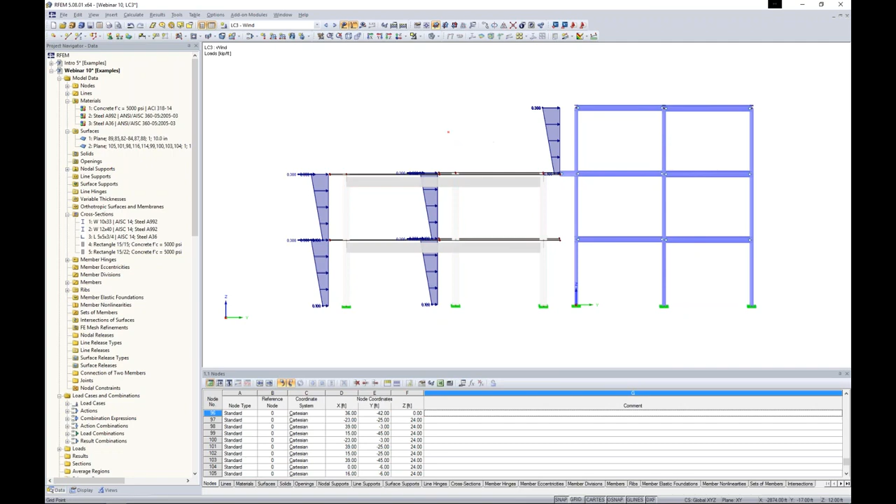So maybe I'd like them in the same orientation. Well, for this, I can highlight all of my columns, right click, and choose under member here to reverse the member orientation. Now my loads look more similar to my steel. That's just another option you have if you want to quickly reverse the I and J ends of your members.

Now with that said, you can see that all of our different load combinations with the correct load factors will be applied graphically here as we scroll through the different applications.

And now I'm ready to run an analysis. The first thing I want to point out when we run an analysis is under Calculate, FE Mesh Settings, the global mesh settings are set at 1 foot. I think this is fine for maybe an elevated slab, but you can always change these to something smaller as well. We do have FE mesh refinements that you can create about a particular node or line within the element—it's a little more advanced feature that we won't get into today.

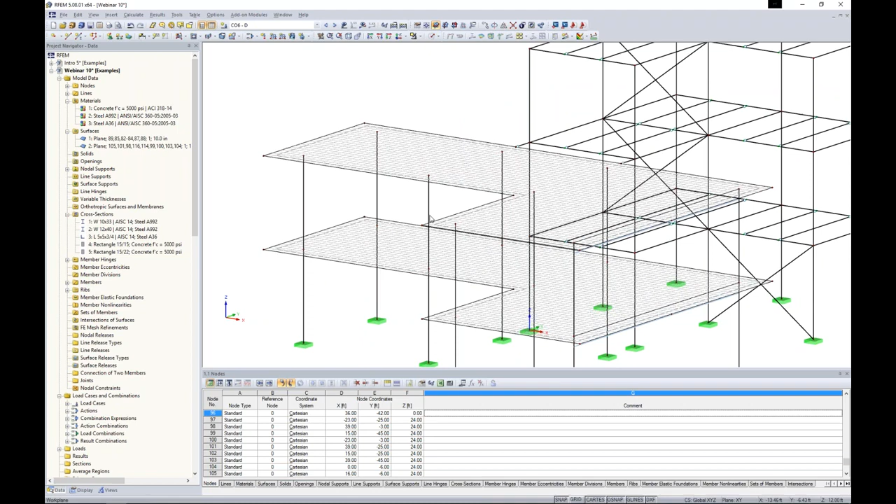But if I go to Calculate, Generate FE Mesh, and turn this into wireframe view, you'll notice that everything was automatically created for me. I never have to worry about tying these nodes into elements or making sure that my FE mesh is submeshed further—the program does all this automatically. If I were to make any changes within the model, move these columns around, everything will be updated accordingly.

Okay, so we're now ready to run an analysis, and I can simply go to Calculate, Calculate All. Now the program is running through all of my different load cases, load combinations, and result combinations. It is doing a nonlinear analysis, and the reason why is because we want to take into account both big P delta and P little delta. We also get a little diagram here showing us our iterations versus our max displacement. If you notice that this is starting to just increase and increase and increase, then we probably have some type of instability within the program.

After the analysis is run, the program automatically jumps to our results tab available in our project navigator. Here is where we can graphically view all of our different deformations, for example, in the different translation and rotation directions. Under the display tab and under the results tree here is where we control everything that we're viewing graphically for our results.

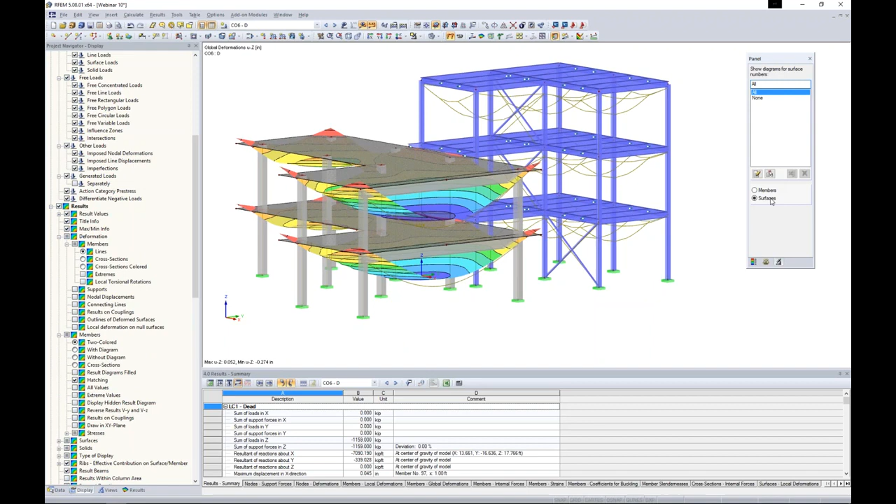So you can feel free to change this around if you'd like, if you don't like the look of some of it. Back under the results tab, we also have the options to view members—for example, maybe I want to take a look at this column line here, and I can create a specific visibility. When I'm looking at my members tree, I can activate maybe my axial loads within my columns I'm interested in. We can take a look at moments here, shear forces, everything that's of interest probably for our design purposes.

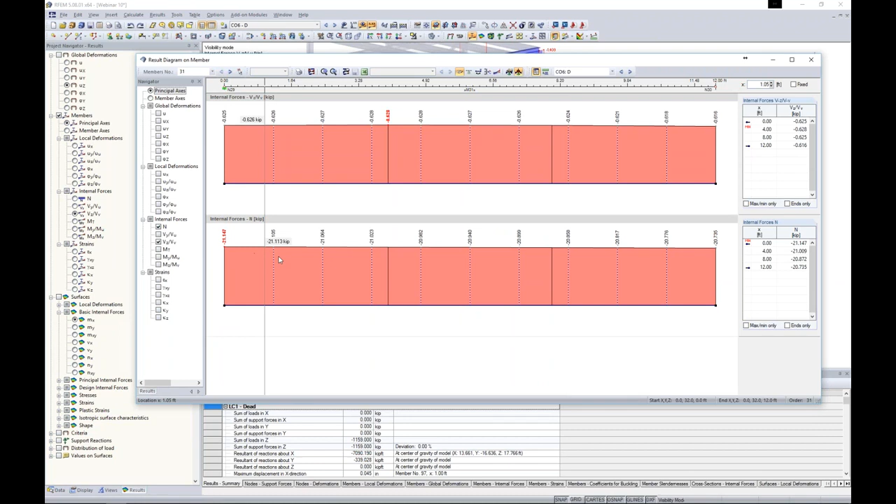I can always right-click on any one of these and choose results diagram, and when I choose results diagram, I can turn on those same diagrams, but this will just give me a little bit more of a useful look at the magnitudes along the length of my members for my internal forces. We can also scroll between the different load combinations here, and we can even change members with this drop-down box.

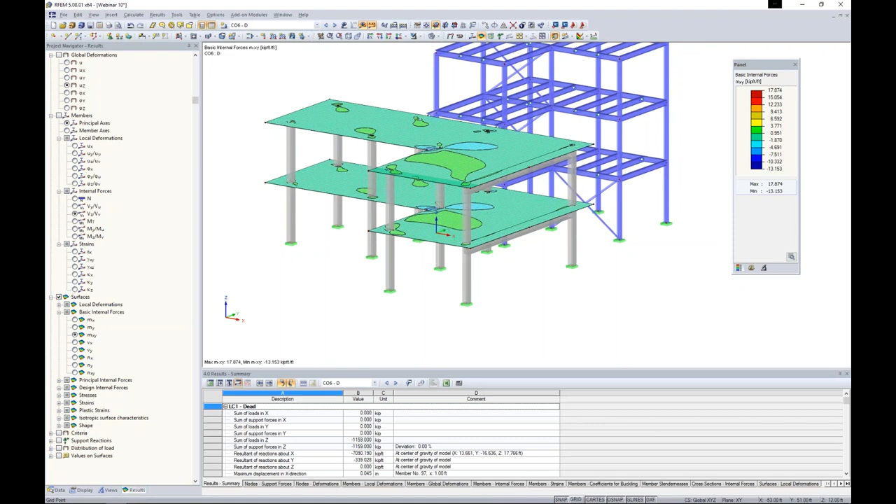And lastly, we have our surfaces available. If I cancel out this visibility mode, and I zoom out, let me turn off my members. Well, for our internal forces here, these are important for concrete design purposes. We give these to you in terms of contours. We also have section cuts, but again, I won't get into the details of that. But we can view our surfaces here, such as MX, MY, MXY, that are important when we're looking at reinforcement design of the surface.

So with that said, everything that we've done up until now has been in RFEM alone—this is the analysis portion. I want to make the clear distinction that I want to jump into one of the add-on modules. So back under the data tab, now I'm deciding, okay, now that I have all my internal forces, I'd really like to take a look at design per the AISC. So I'm going to launch my add-on module, STEEL AISC. And you'll notice the add-on module is nothing more than a simple dialog box within RFEM.

All of my materials, cross-sections, geometries, and member lengths are all brought into this add-on module, including our load combinations. All I'm doing is specifying a little more information related to that specific standard to do my code check. First, I use the drop-down to select LRFD 2010. For my ultimate limit state design, I'd like to select all of my LRFD load combinations.

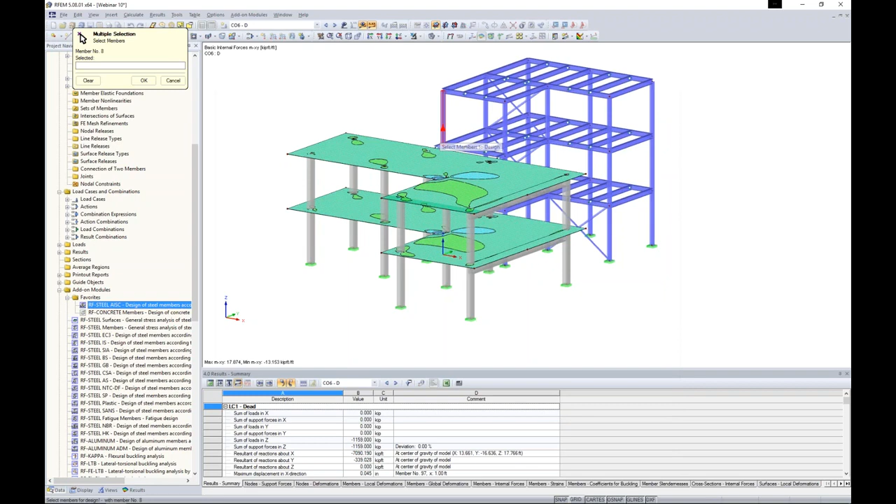For serviceability, I can select my ASD load combinations. For members, I select graphically for design, which I can do by selecting all of my vertical column members. I'm not so interested in these braces, so I'd like to exclude them from my analysis for now, and then I just work down my list here.

Going down to materials, steel A992 was brought into the add-on module. Cross sections, same thing, my W10 by 33 is available. Intermediate lateral restraints is just if we have any top or bottom flange bracing along our member length, we could specify that here. For design parameters, effective lengths is going to be buckling about our strong or weak axis with our unbraced member lengths, which default to the full member length. We also have torsional buckling and lateral torsional buckling that we can take into account.

Design parameters also include a few more variables in regards to AISC 360, such as the C sub B factor. Most of the stuff you can leave at default and let the program calculate for you. Lastly, serviceability data — we can check deflections according to a specific deflection ratio.

Under my details tab is where I have my limiting deflection set at L over 360 for simply supported members and L over 180 for cantilever members. I can adjust this equation or ratio if necessary.

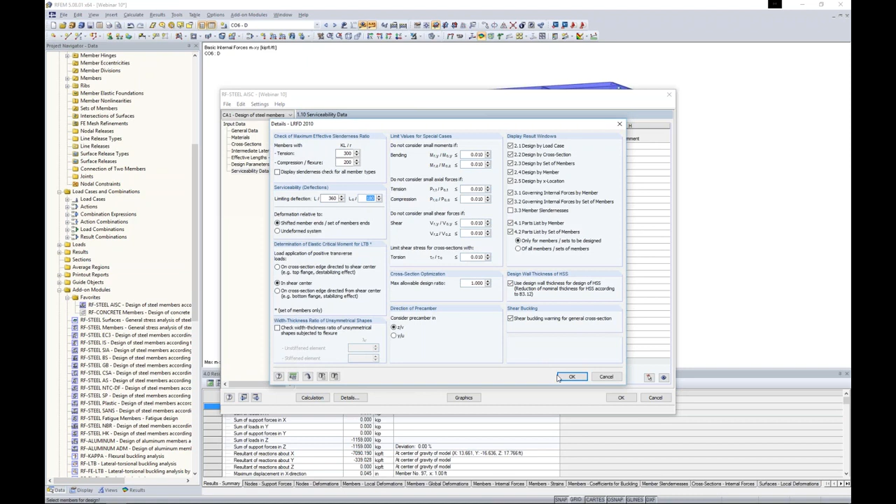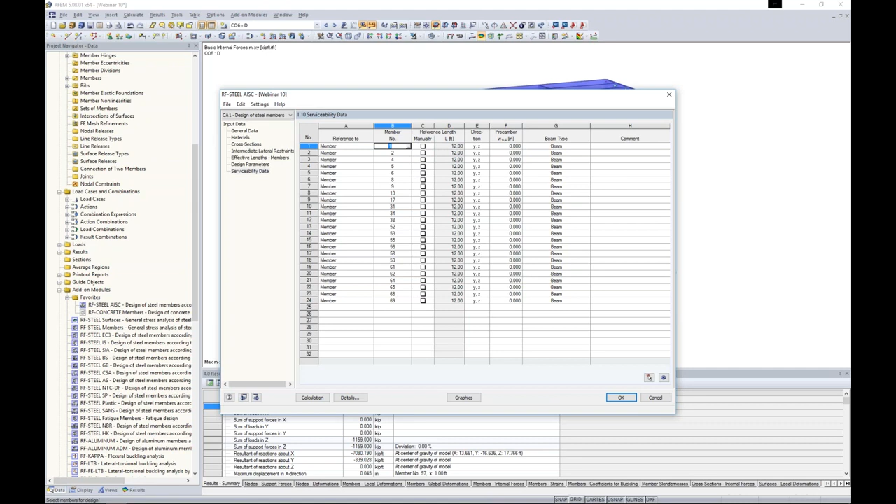Here, all I do is again select my members, and I'm going to select all of my columns graphically. We'll have to exclude the braces because I did select them within my selection box, but I don't want to check the serviceability for them right now. The full member length is default here for the reference length. I can add in a pre-camber if I'd like to, and then I'm ready to run my calculation.

You'll see that this solves within a split second, and that's because the internal forces have already been solved for within RFEM. All it's doing is taking those internal forces into this add-on module and applying the code checks to those specific members. So our results are available here, designed by load case, designed by cross-section. We can even view the design by member.

What's nice is that as I scroll through this table in my add-on module, you'll notice that I'm synced up to the graphics view within RFEM. Even this big red arrow tells me exactly where my internal forces that are controlling for this specific code check are.

One very powerful feature, which I always point out in almost every webinar, because I think it's a bit more unique to our program, is that we don't just give you our controlling code check with a big green smiley face because we're under 1.0 — we give you the code check that's applicable throughout the entire AISC for that specific member. You'll see Chapter E, Chapter F, Chapter G, all of those checks will be given to you here. And even more so, we give you all of the variables that go into play for this, as well as the variable references directly to the code. So again, we're just trying to be as transparent as possible about where your numbers are coming from.

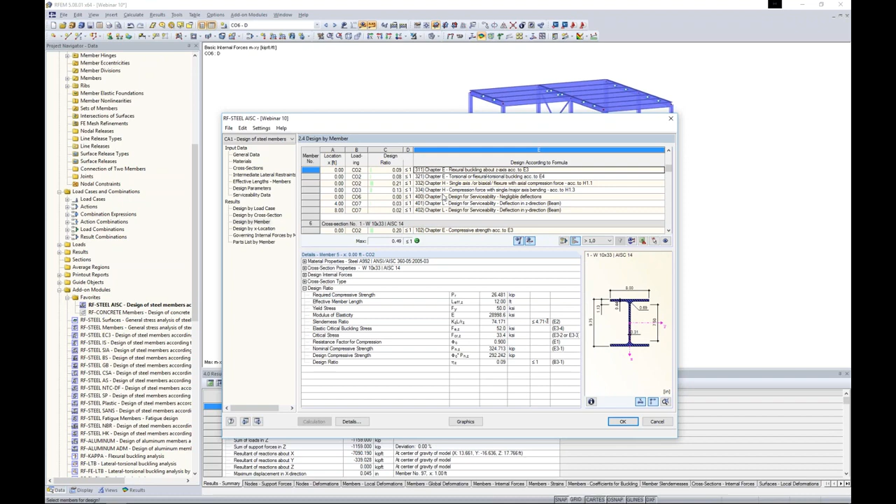We can also view everything graphically here, and when we're in the AISC module, which you can see from our drop-down list, RF-STEEL AISC, we can view either the ultimate or serviceability cases graphically if we choose to do so. So that's really all I wanted to show you in terms of the steel design.

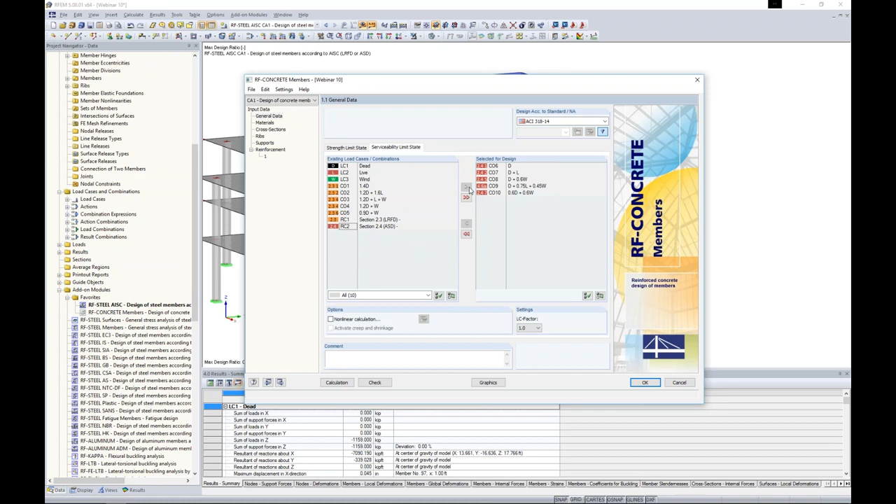So once you learn one, all of the rest of them are pretty intuitive to understand how to work through. The first thing we do is select our standard ACI 318 from our drop-down. For strength limit state, I'll select my LRFD load combinations. For my serviceability limit state, I'll select my ASD load combinations.

Moving slowly down the list: under materials, F'c 5000 is applicable. You'll notice the steel options are red, because they cannot be applied in a concrete design add-on module. That makes sense, no problem.

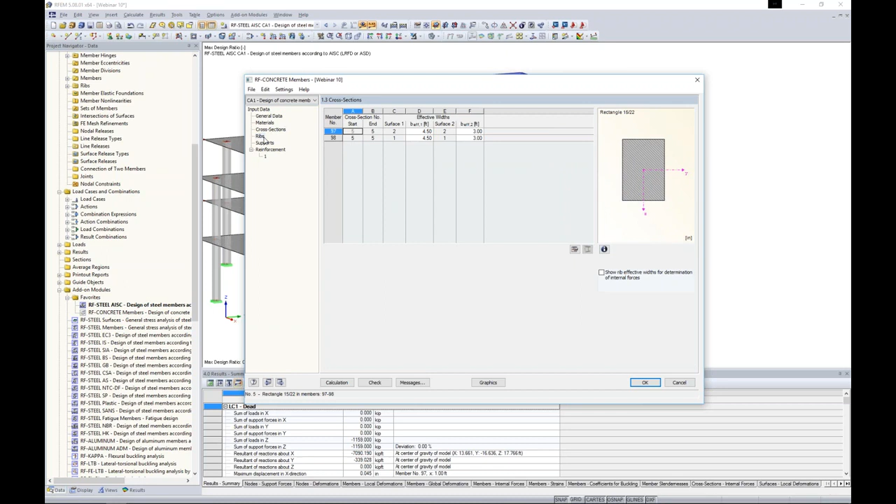Cross sections, same thing. The only ones applicable are going to be our rectangular concrete sections here. The program is smart enough to recognize that we have some rib members, and it will take into account the effective widths when we're looking at design purposes, which we'll see in just a moment.

Under the reinforcement tab, this is where we specify the different longitudinal and shear reinforcement factors. You'll notice that all members are being designed, but we have a steel section pulled up in our concrete add-on module, which will probably give an error if we try to design it. So instead, I'm going to graphically choose just my two rib members here, click OK, and now here's our rib member shown in our preview box.

Working from left to right, I want to choose my longitudinal reinforcement. Maybe I'd like number 8s and number 9s, and I can choose maybe two layers for my longitudinal reinforcement if that's needed. The anchorage type we can change to straight or hook, and for bend, you'll notice the picture updates here according to whatever selection we choose.

Ties and stirrups, same concept - maybe I'd like to choose number 4s. We can also control the spacing of the shear reinforcement down here at the bottom. The reinforcement layout is just cover spacings, and the picture here will update to show you exactly what variable you're setting within this entry on the left for our cover.

The reinforcement layout has some different options, whether we want an optimized distribution or maybe we want to set a ratio of our top reinforcement versus our bottom reinforcement.

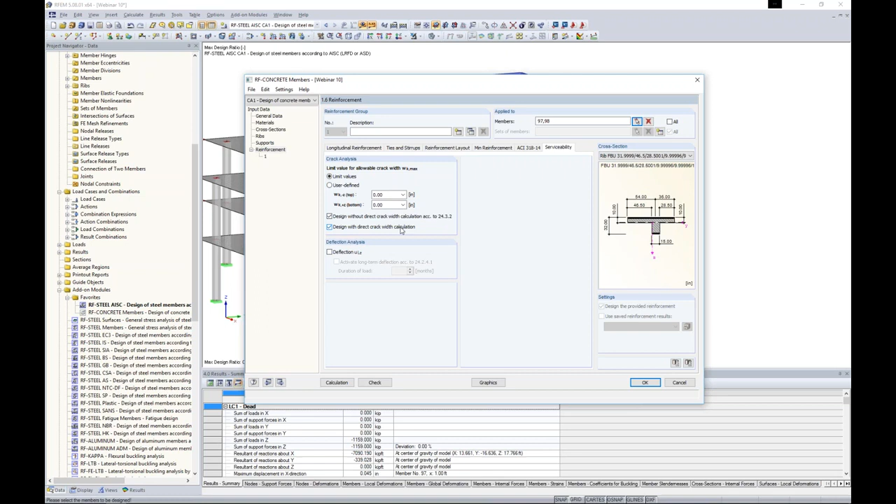Now we can apply the Gergely and Lutz equation to come up with a theoretical equation to calculate the crack width within the member and compare it to some limiting values here. If we want to do so, we have some suggestions here from the ACI committee. Maybe we will choose 0.02 because our structure is in a very dry environment. So now we'll check according to both crack width and spacing requirements for serviceability.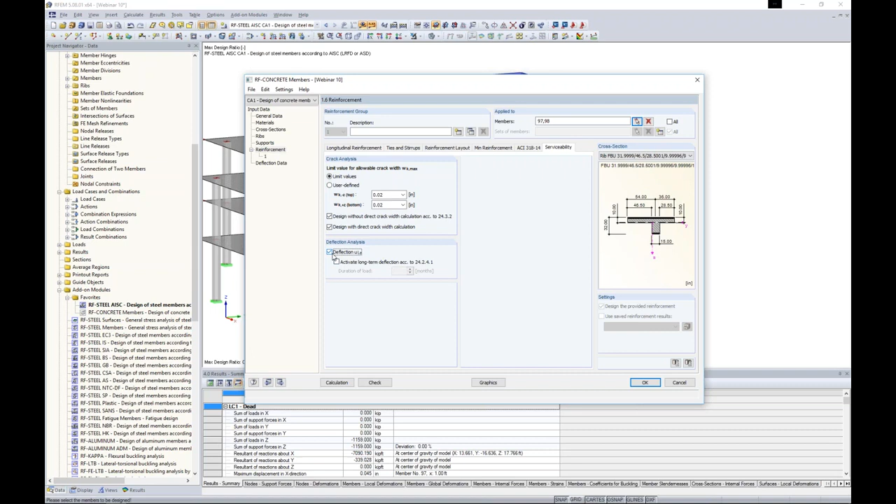We can also take into account deflection, and more so activate the long-term deflection with a specific factor according to section 24.2.4.1 within the code. So now we're ready to run our calculation.

All of those internal forces are already solved for in RFEM, so you'll see rather quickly that we get our results for our two rib members. We have our results section here, of course required reinforcement, and this is just based on the internal forces. You'll notice a few additional notes here.

We can always click on messages to see those code references of exactly what these little notes within the program are trying to tell us. Then we'll get provided reinforcement. This is nice because required reinforcement is okay, but this is just an arbitrary number, and we'd like to see the applicable bars within the design to see how we're going to meet those required reinforcement.

So we have both longitudinal reinforcement and we can see our shear reinforcement here. Now we have pretty close, tight spacing here of our shear. That's probably because of some torsion effects, which we could always go back and choose to uncheck for our internal force design.

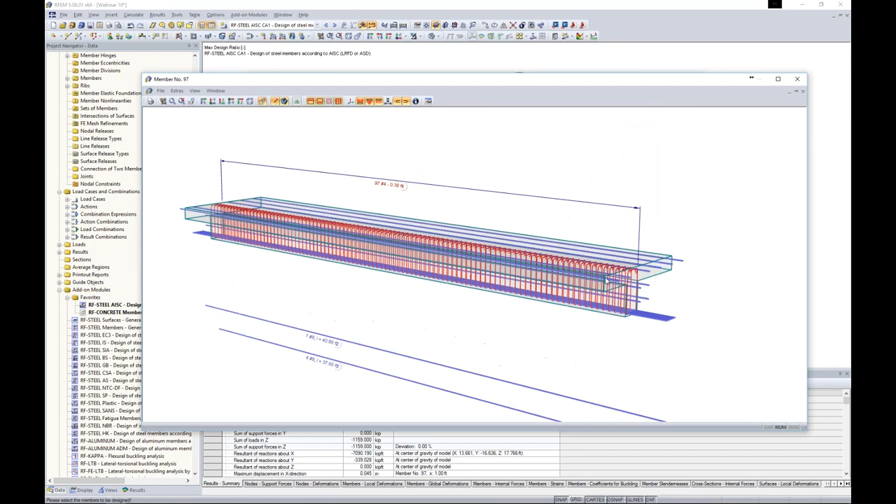Now, if I choose 3D rendering here, this will just give me a nicer view of my reinforcement throughout the member. Maybe I'm not happy with one of these. Well, I can always double click on one of these reinforcement settings and adjust my bars here, including the location of the spacings along the bar length. So very, very powerful when it comes to our reinforcement for concrete.

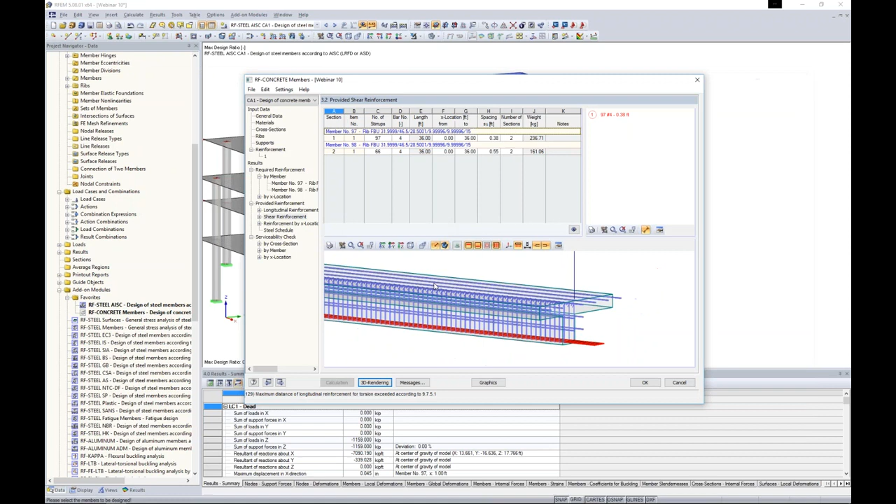Okay, so exiting out of this 3D view, we also have our serviceability check. This is more so in table format. Looks like our limiting spacing for our torsional reinforcement is exceeding the capacity here.

Well, this is a good example here of a live webinar. It was passing before, but it looks like now we aren't passing, so maybe we'd want to go back and address some of the spacings for our longitudinal and shear reinforcement to meet those code standards. But again, this will just show you when you aren't passing and how to better change around the input data to meet that.

So for now, we'll forego this and jump into our graphics view, which I just lastly want to show you that, again, we're still within this RF concrete members here, and this means we're still looking at the add-on module. We're just viewing graphically some of our results.

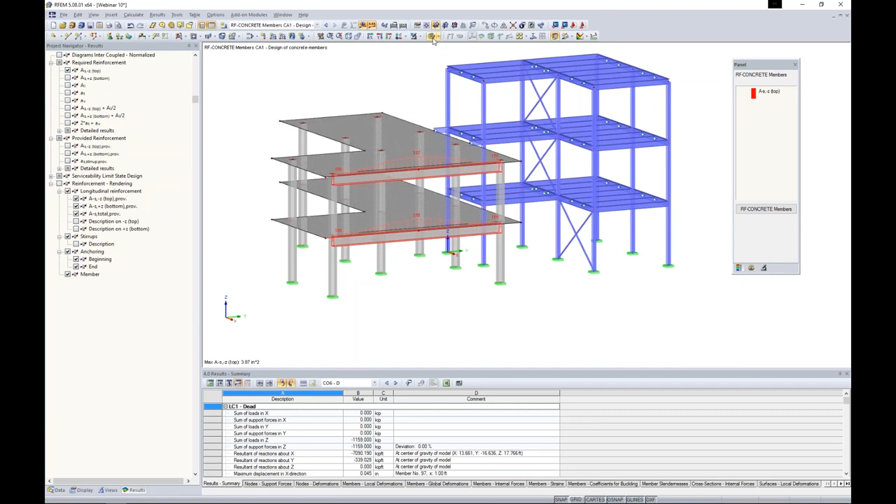So here's where our required reinforcement is. And you'll notice that maybe I could create a little section view of my two members here that I designed for. And I have my AS top required, my AS bottom required.

Now maybe I want to compare that to my provided reinforcement. So for example, I can turn on my AS bottom, which is this nice diagram here given in inches squared per foot, and I'd like to see how my provided meets the required. Well, you can see that it looks like we're well over the required reinforcement ratio here.

So you can view everything graphically. What's also nice is that if we turn off these diagrams, we can also view a rendered shape here of the reinforcement within this particular model, with even the rib section. So we can always add this to our printout report if we see this as fit.

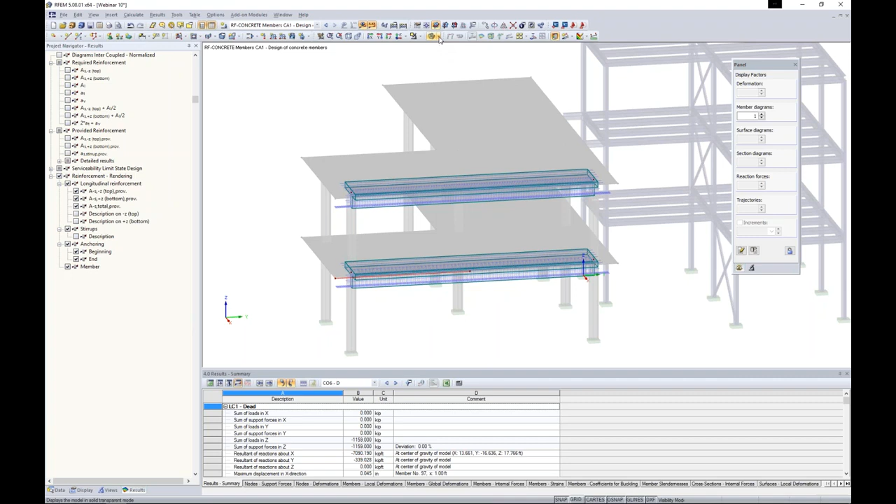So again, breezing through this add-on module, I have an entire previous webinar that I dedicated to only column and beam design for reinforcement. I also did another webinar that was strictly for surface design, reinforcement design according to the ACI, which I would encourage everyone to take a look at if you're more interested in those capabilities.

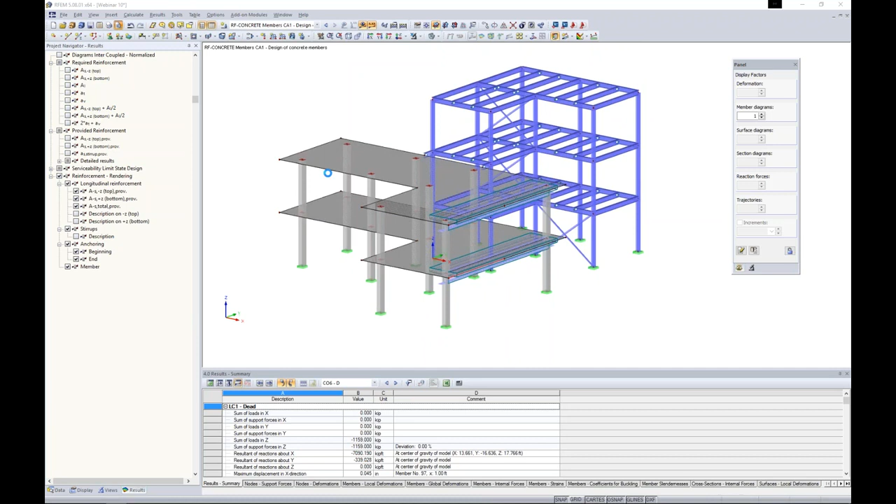So the last thing to just show you before I sum up this webinar is our printout report rather quickly. Up here at the top, we can view our printout report, and the program's now cycling through to create that printout report. What it's going to do is open up this completely separate application. I think that our printout report is very, very powerful.

You'll notice that we have our table of contents, which looks very similar to our project navigator back in RFEM. As I scroll through these different options here, and maybe scroll in to view this a little bit closer, well, the program's going to update in my graphical view as I click on my table of contents over here on the left. I think everything is laid out quite nicely in terms of the different tables.

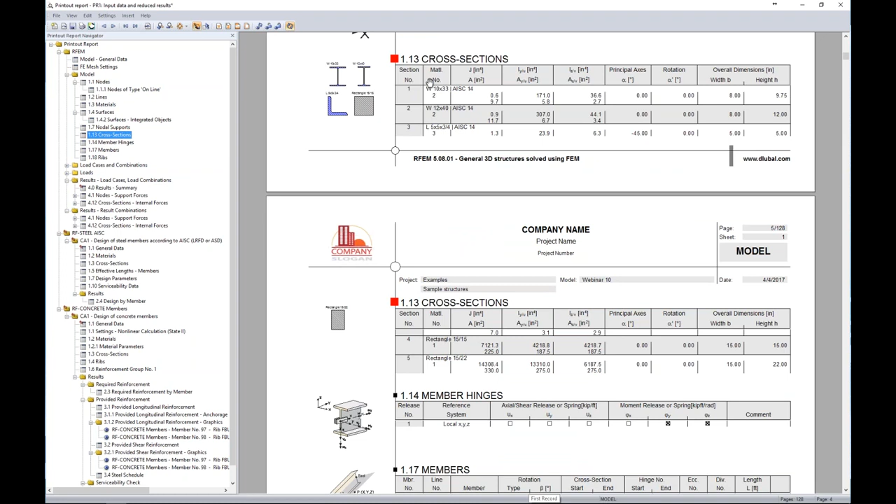For example, if we scroll in here to cross sections, you have a nice little picture showing you all of the different cross sections that were utilized within the program. If we take a look at member hinges, we give you a little picture here so that your engineer reviewing these calculations won't have any question about which axes they released or which they didn't, but with this picture that will be helpful for those review engineers.

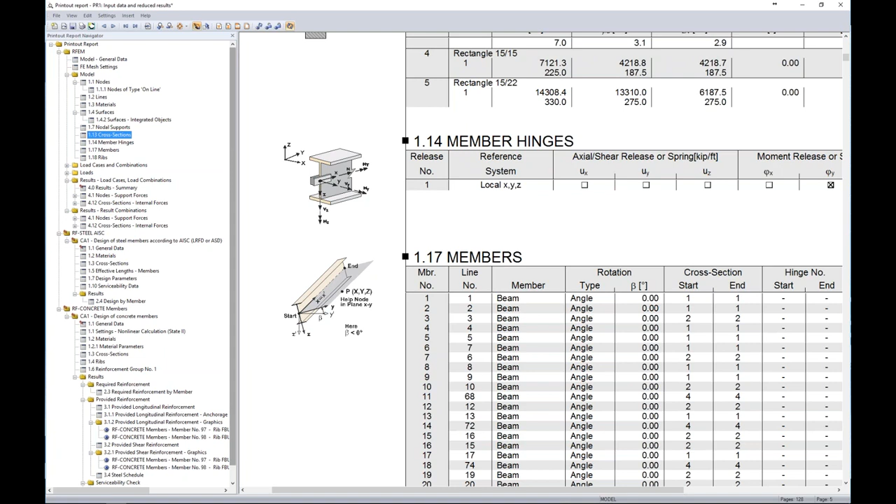We even have our add-on modules located down here on the left, which you can always move around the orientation or the order of these modules if you'd like. And for our concrete members, we also automatically create a nice picture of our reinforcement, which is a nice touch to the RF concrete add-on module.

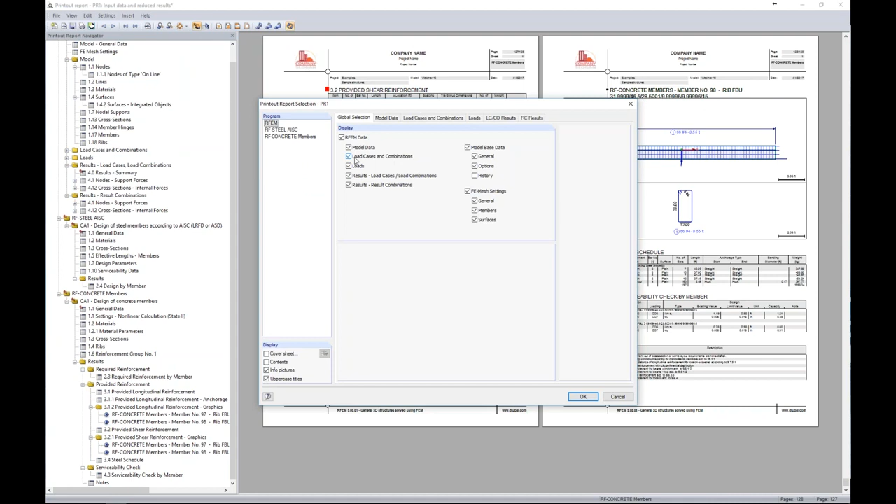So you can add on your company logo here. Very powerful, and I think it's laid out quite nicely. Under Settings, Printout Report Template, Edit Selection, we can always control what we are and what we are not seeing within this add-on module. The last thing to show you is to maybe exit out of this.

And of course we always want to add pictures to our add-on module. Just a nice feature to show you: maybe we select this column line and show our visibility by our selected objects here. I can zoom in, and I'm going to jump to one of my load combinations. Here I'm going to display my support reactions, and I'd like to print off this picture, but I'd like to do it for all of my load combinations.

Well, we have a nice feature: if I go to this Print Graphics option up here, we have Mass Print. Now when I go to the details of my mass print, you'll see we have 3 different tabs here, but right now the program's suspecting that I'd like to view what's already turned on here, my support reactions, because that's what I'm viewing graphically in RFEM now. Well, I can choose the option to print off all load cases and combinations at once.

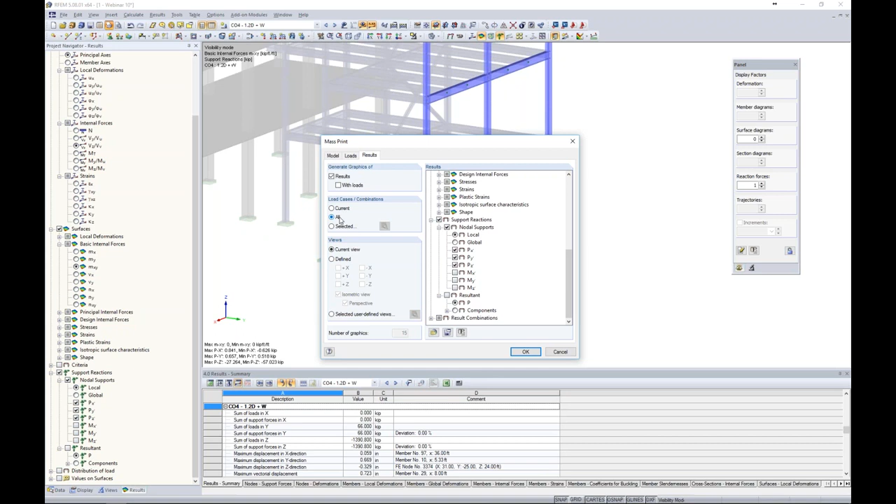So what does this do? When I click OK, the program's going to take this exact view that I'm looking at here, and it's going to cycle through all of the different load cases, load combinations, and result combinations to show me my different support reactions in all of those scenarios. It's going to automatically create those pictures, export them here to our printout report, and now you'll notice I have this little list here in my table of contents of my support reactions.

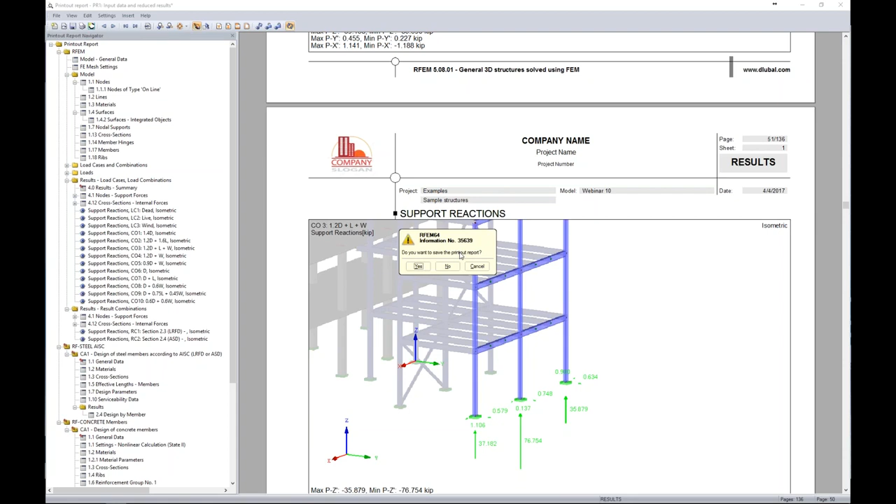If we zoom in, once this loads, you'll notice that as I scroll down through these, I have load combination 1, load combination 2, 3, and all of those support reactions are automatically generated. So it's also a nice feature that if I go back and make any changes to the add-on module, or to RFEM, or basically to the structure in general, these pictures will be automatically updated, so I don't even have to worry about reprinting them. So again, just another useful feature rather than sitting there and having to print off each individual picture yourself.